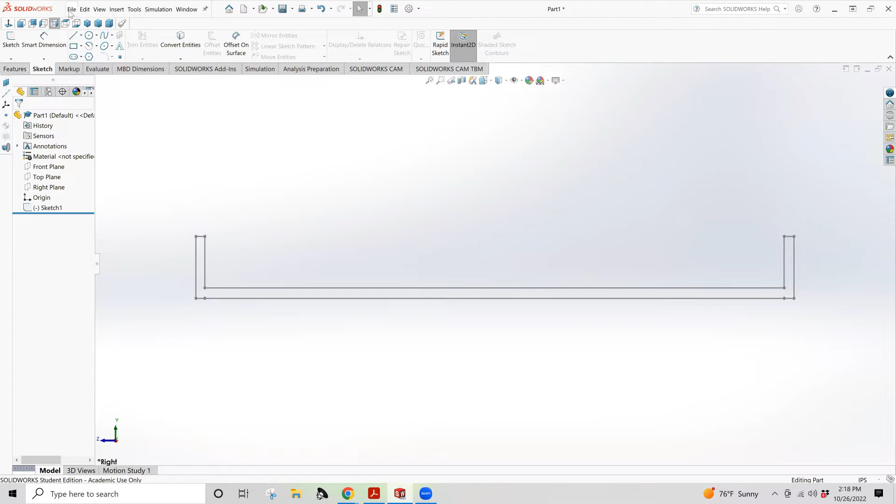And Zoom makes some of this fun stuff disappear. Note when you change that length scale for things, it's going to kick you out of whatever sketch you were in. So you got to step back into it and continue editing. So this in total is 2.7 inches. That will reset kind of the scale of things, make life a little bit easier. Smart dimensions, here we go.

You're going to have to go back and forth with the tools and do a lot of little detail work. So this is 1/2 inch. Now here's the real question. Based on the dimensions given in the drawing, can you guys figure out what the thickness of this plate is? Somebody drop it in the chat for me. There's an obvious answer, but we all know that the obvious answer is usually obviously wrong.

So somebody see if you can identify from the PDF what this actual thickness needs to be. It should be a PDF that's attached to the announcement. I should be able to drop it here as well, so long as Zoom cooperates, which is not really an ironclad guarantee. So let me pull that up real quick. All right, so you should also have it in the chat.

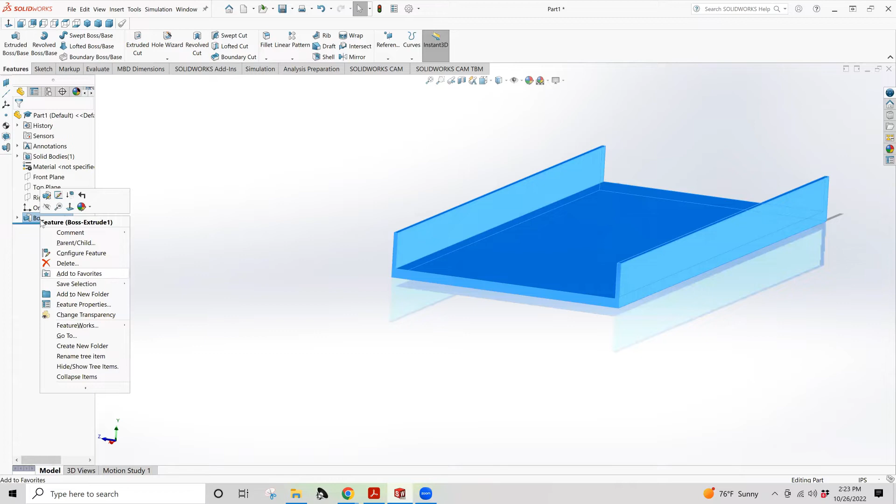After you extruded it, how did you create that symmetry? So the symmetry here is just from the base sketch that we're editing. And since I don't know exactly all the details you guys have covered in class yet, I'm not going to just assume and kind of rip through all the parts. So this is what our sketch looks like.

But that aspect ratio is not quite correct because of the difference in overall thickness. I'll do it up here so that it's a little bit more clear what's going on. So we know this is 2.7. We know this interior is 2.6. I was only off by 0.010 of an inch. I just want the record to show.

And right now, this is a non-uniform thickness on either side. So the point that we have to drive home here is this. It actually becomes a thickness of 0.05 inch because you need 2 of those to get between the 2.6 and 2.7, right? So it's half the distance of the difference in between those. So 2.7 minus 2.6 divided by 2 is 0.05. And that's our thickness on this part. So this part wall also needs to be 0.05, not 0.1.

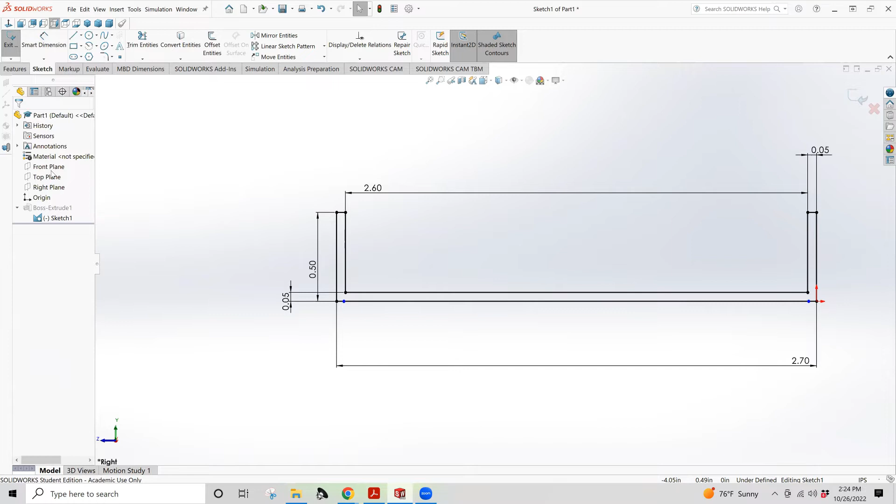And then if we hit the check mark, we step out of the smart dimension, we step out of the sketch, and we have our base for this plate, right? So in a single sketch, we captured a good 3/4 of the important detail and key dimensions of this part because we're trying to take advantage of the symmetry of the part, right?

Because you could spend probably 20 minutes or at least a good 10 minutes extruding a rectangle on the bottom, then making a plane on this side, and then doing a sketch and extruding it, and then doing a plane on this side, and then doing a sketch, and then extruding it. Or you could leverage your symmetry, and I will open up as an example, because I did that with the part yesterday.

Which one? I want to say that was 2, maybe. Let's see if I remember right. Yeah. So this one, as soon as it finishes loading, come on, load the model. This is interesting. Let's see. All right. So this should be actually opening the part. That's very interesting. Why did it not open the actual part? Here we go.

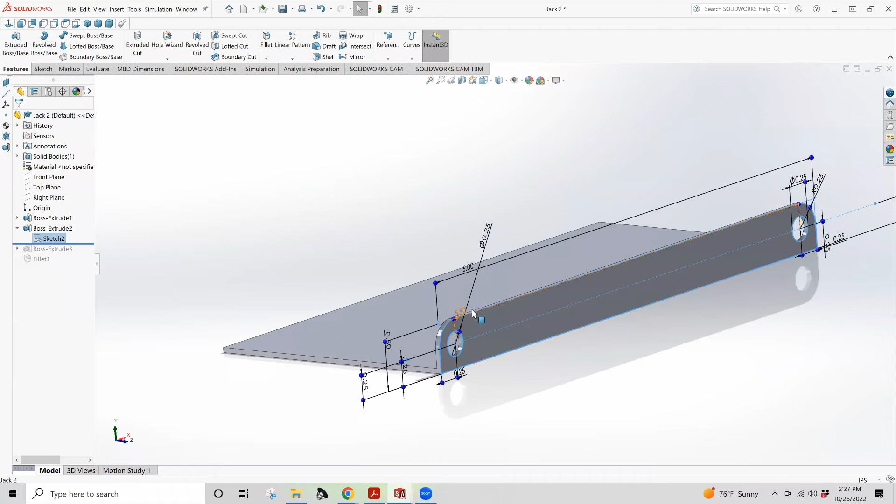Okay, there we go. So this is what I was trying to show you, the part detail. So this is part of the reason why the part tree is so important. Hopefully Dr. K has gotten a chance to speak to all of you about it. So the default is often to take an approach like this. You extrude a rectangle, then you make a plane, and you make a sketch on that plane, and then you extrude. Now, in this case, I leveraged the same sketch to do an extrude and did different parameters.

So I'll show you what both of those look like. And this is a perfectly valid approach. It just takes more time than it absolutely needs to. So you start from the sketch plane, do a blind extrusion, because I extruded it from the very edge of this face and extruded it in by 0.05 inches. Then on the other side, I used the same sketch, but extruded it going the opposite direction from this face. So one sketch, two different extrusions, right?

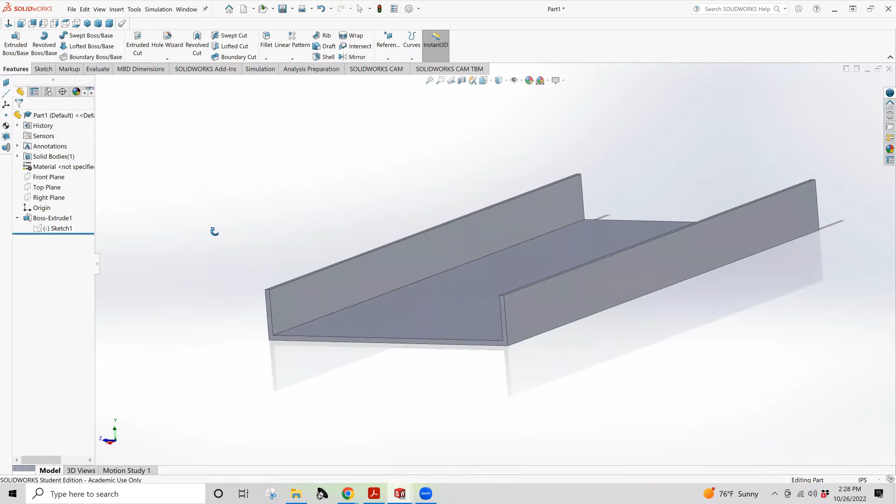This is another approach that you can take, or you can manually redo the sketch. Sketching takes a ton of time. It depends what's the most time efficient, but often what you'll find is the approach that I'm showing you is what I recommend, because that's going to leverage the symmetry of the part the most. So the time and everything like that won't necessarily be to scale, but there are a few things that you can capture very, very quickly, one of which is this fillet.

So it helps to kind of zoom in and find all of your individual edges. These need to be a 0.25 radius. And then the second fillet, based on the information in the drawing, is going to be these two interior edges, but these are a 0.025. So they're a very small fillet. So now we've captured all of our fillets, right?

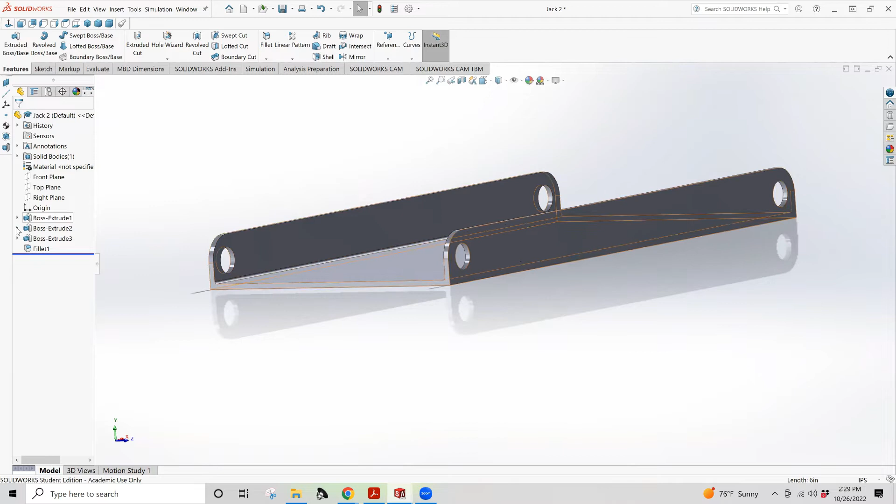So we've done a similar number of operations compared to the other method. But here I did most of the detail and then just did a final fillet. So instead of doing a fillet on the already extruded part, this was done on the actual sketch itself. So I did sketch fillets, which is this tool. Hopefully you guys have seen how to use those. So there's a few different ways that you can go about it. This one just happens to be the most time efficient.

So now what you can do is, with a single operation, you can add a sketch to that surface. No, not edit the sketch. I want you to do what I say.

Sometimes you'll have to start a new sketch. Sometimes SolidWorks will do interesting things, so you have to step out of a tool using the escape key, then step back into it.

So here we're going to need just a couple circles. These are going to be pretty easy: 0.25 inch diameter, and they're going to be on what's called a 1/4 inch pitch. So 0.25 inch and 0.25 inch. Pitch has to do with the spacing of holes.

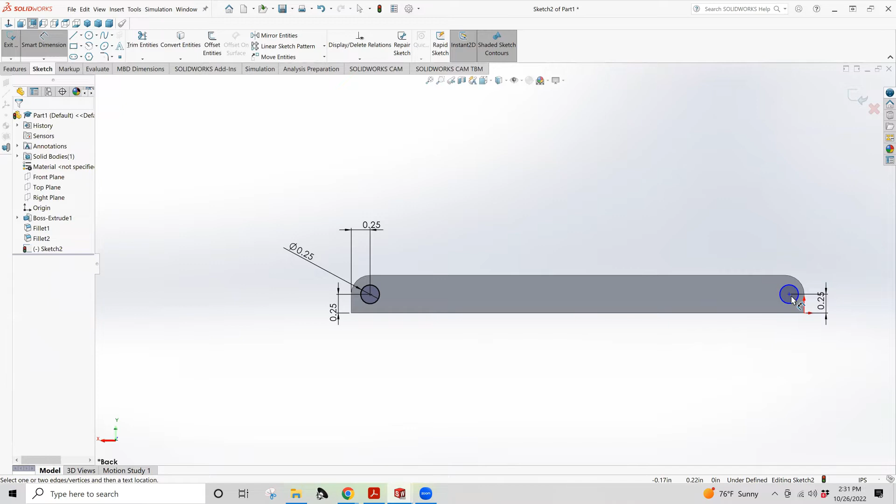You can either index based on the bottom edge, or it really helps to zoom in. You want to pick that flat edge, and your radius, so diameter of 0.25.

So now we can simply do one quick extrude cut. We already have that sketch highlighted. You're going to switch from a blind to a through-all both, which is cheating.

And that part's done. So the only other thing you would need to do is specify, I think this one is an AISI 1020, so we'll go ahead and specify material. Yep, AISI 1020, apply that. All right, so now we have our material applied.

The material is going to make a huge difference. I know Dr. K has already focused on that with you guys, so we won't spend a whole lot more time. I'll pause here for a second and see what some of the questions are, so I can get some feedback and address any concerns.

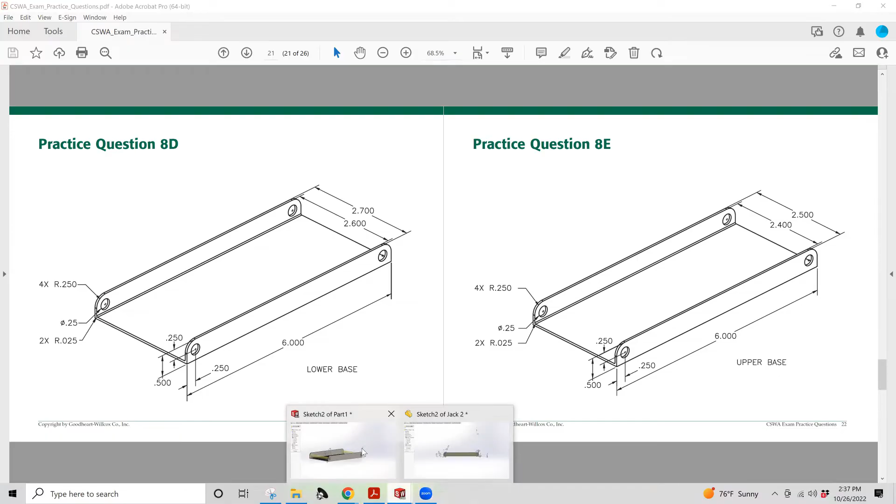So there's two different approaches we can take to this. One is going to be really, really fast, and one is going to be really, really slow. For this one, we use the technique of this base sketch and extruding. For the next one, we can show what it looks like to use multiple solid extrusions. It just takes a lot longer.

The quick and dirty method of recreating this is — in this case I'm going to save this as 2B, because I know something about that part numbering scheme, not really important why. What you want to do is look critically at the drawing, and if you have two parts that are very similar — in this case 1/4 inch pitch, meaning 1/4 inch from the edge, same radii, same diameter holes, same part thickness, same fillet radius...

If all of those kinds of features are conserved, rather than recreate this in a new sketch, the simplest method is to go in and redefine the base sketch that we used for the symmetry. This is part of thinking sort of what Back to the Future referred to as fourth dimensionally — this is actually thinking fourth dimensionally, but in a real sense.

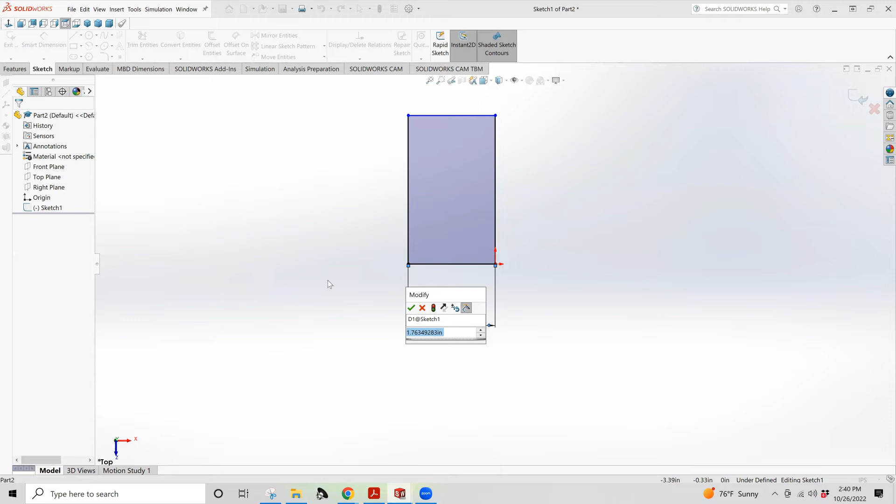So 2.5 is the outer dimensions, 2.5 inches, and then step back into the smart dimensions, 6 inches length. Now, another way that you can recreate most of the geometry without doing extra work is to think: I know I'm going to have to extrude these. Instead of thinking about extruding them from the side, we're going to use the same base sketch to capture as much of that detail as possible.

So this is going to be our same 0.05 inch thickness. We now have a fully defined sketch. Okay, the base is done. The reason I've done it that way is I know I'm going to use this sketch.

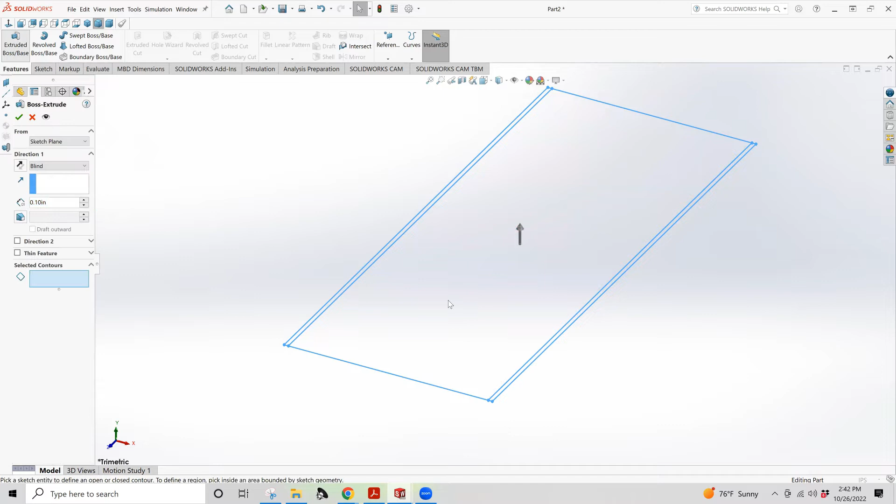I'm going to zoom in to select all 3 of these regions. Or you could do it if you just wanted to do 2 operations because of the different thickness. You could do it this way and say, I want to do the interior region, 0.05, and then say, I want to do another extrusion. You want to leverage that same sketch so you don't have to go in and recreate dimensions 6, 8, and 32 times.

And you know those 2 features are going to be the same. You always want to deselect the thin feature because the thin feature always ruins your life. Thin feature typically tells you that you have a non-closed sketch or an open looped volume.

So I'm going to delete this contour because that creates confusion. A lot of times I'm in the habit of clearing the selected contours so that I know exactly what it is that I'm selecting. I like to just have that level of control over the operation that I'm doing. And you extrude this to 0.5 inch.

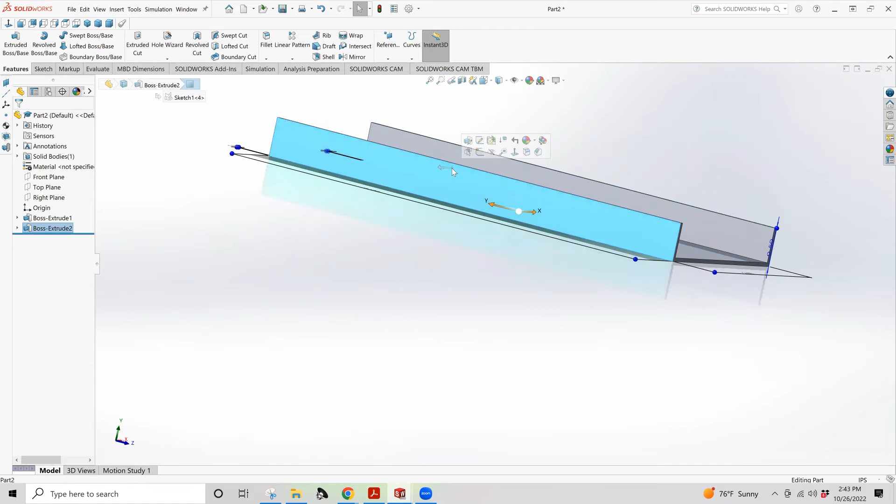So similarly, I don't lose a lot of time using this technique because I know I'm going to do these 2 extrusions. But compared to doing the same sketch on the side plane and then doing an extrusion, then recreating the sketch on this side and doing another extrusion, I'm trying to always think in terms of how do I approach the geometry and do as few sketches as possible to get the most level of detail possible out of the part.

So this is just the way that I've come to think about how I approach parts, and it served me really, really well in SolidWorks. So I'm trying to impart that to you. I know Dr. K has some similar ideas, but he teaches a little bit differently sometimes in the approach. So this is hopefully stuff that will just get you guys to think about the parts themselves.

So now we come in, do the same thing with our fillets, but I want to deselect that face. I always want to be controlling what faces or facets are being filleted. So I'm constantly zooming in and out, constantly moving parts around because I need control over what the operations are. Nope, not that face. Sometimes the mouse is there to help you. All right, so 0.25 inch radius.

All right, so we've got the majority, and then we just need the same things. We need to add a sketch, and we can click a face of something. We don't always have to use a reference plane. I'm in the habit of using reference planes often. That's why I have this reference toolbar available on my left side.

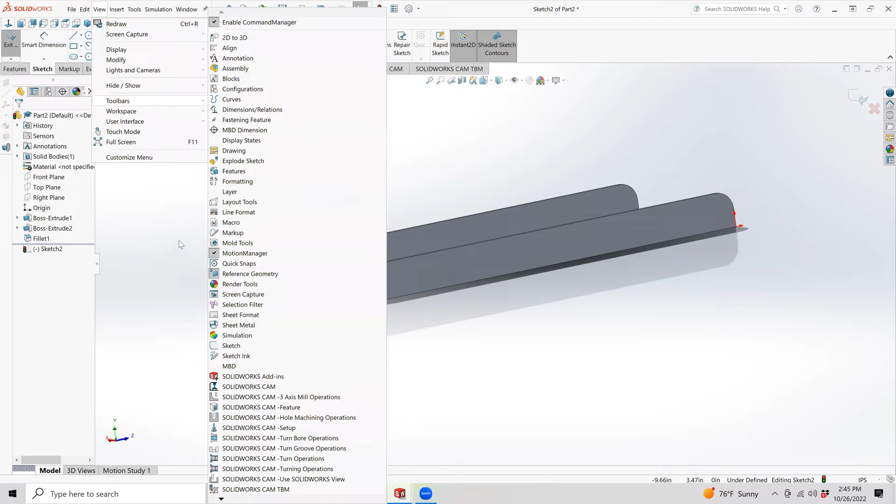So if you guys haven't seen that, make use of this view menu under toolbars and select ones that you're going to use all the time. Reference geometries for me are key for a lot of things. I'm not doing mold making and other things very often, so the reference geometries, that just happens to be very accessible because that's probably really a thing that should be here. It's more easily accessible in the sketches, but a lot of times you need it in the assembly operations and things, but you need it often in the sketches as well as you're working. So yeah, there's a reason why it's in the features panel instead.

We won't go into that now, but this one I'm going to go ahead and draw on the side just to be quick and efficient. So same deal, 0.25, then set up the 0.25 pitch.

Same thing here. And you can even make better use of some other features, like for instance, if I didn't want to do that, I'm going to step out of the tool there. I'm going to delete this. Yes, universe won't actually explode. If there's a lot of features, then what I'm going to do is I'll step out of that sketch.

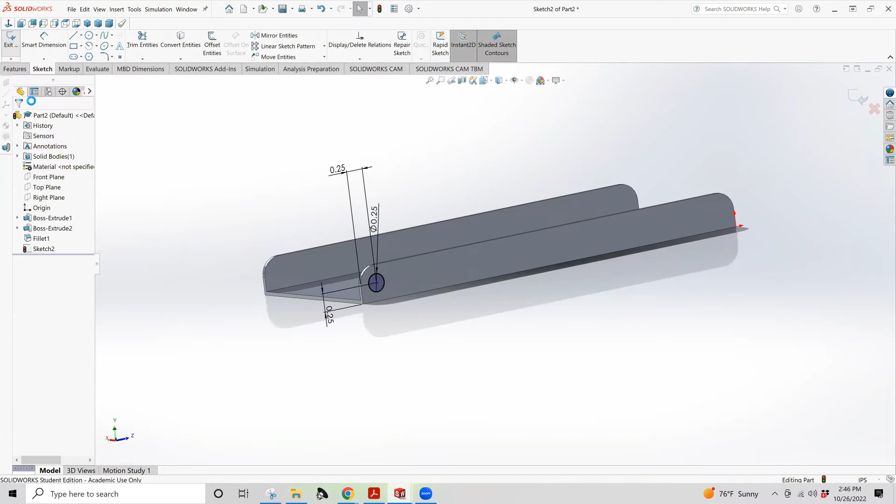I'll make a reference plane, but I'll do it in this way, where I'm going to pick the actual points, not an edge, but I'm going to pick the actual center point. I'm going to pick the center point here. And then I'm going to pick the center point here. And that usually gives me, even if I use this one, there we go. 3 points defines a plane.

What I can do is use that plane as a bisector if I'm working on a part that has symmetry side to side. There's a couple ways you can do it. Just trying to get you guys to think about some of the different options.

We can go back in and edit this sketch, or we could edit this sketch and say maybe I want to go ahead and do that extrude cut. And I'm going to say through all.

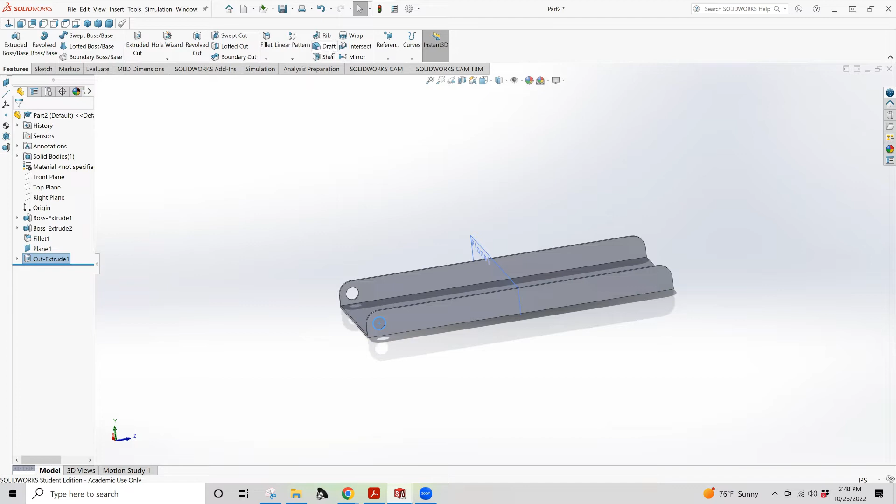And then I say, now I want to take that and I want to mirror this. You can mirror this about the plane. And what you'll see is that same operation can be copied over.

There's a lot of ways to leverage the symmetry in the software that you can do some very interesting things with. You just have to think in terms of how can I get the most effect out of the process. So doing the 3 different sketches and multiple extrusions and extrude cuts is the longest possible way to make the part and is going to consume the most time.

Different approach, still using some of the time-saving techniques in terms of thinking about how to leverage symmetry in the process. Really, I could have just designed 1/4 of the whole thing and done a lot of mirroring to get to the end result.

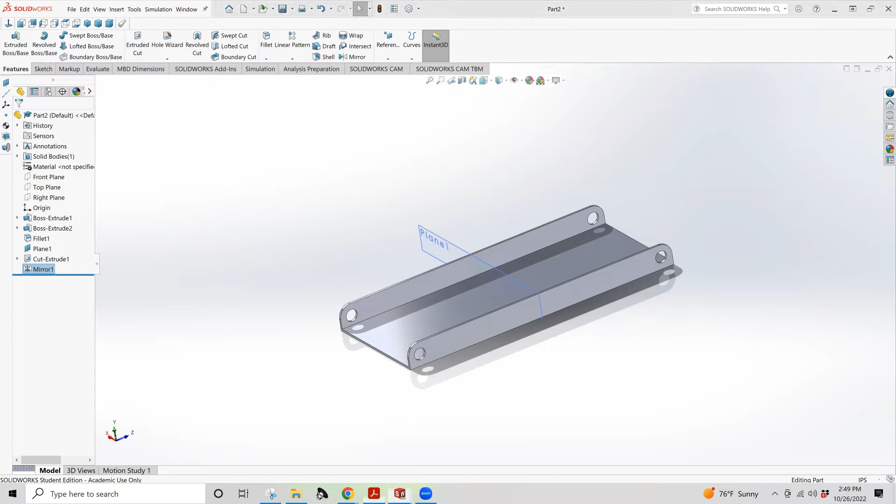But where that's going to bite you is if the part then is told to change. It's one of the things that they'll do, especially in the CSWA, is they'll make you do something and they'll do a part 2 of that question and they'll change these values on you.

So suddenly maybe the length here at B is different in the new version. And then they change the angle for C, and then maybe the diameter of this changes. If you used symmetry for absolutely everything, sometimes they'll make changes that'll make it asymmetrical.

And if you use too much of that and try and be too clever, you can end up having to recreate the part again anyway, or modify the final version. There's still ways around it, but it's things to be thinking about and considering.

All right, so the next group of parts, the cylinder for the center is pretty simple, but let's focus in on the pins and why it's so important to be able to use the symmetry that's involved. So before we do that, any additional questions?

When we go to create the pins here, there's a couple things that we want to keep in mind. One is, because these are cylindrical, there's symmetry. So let's take a vote.

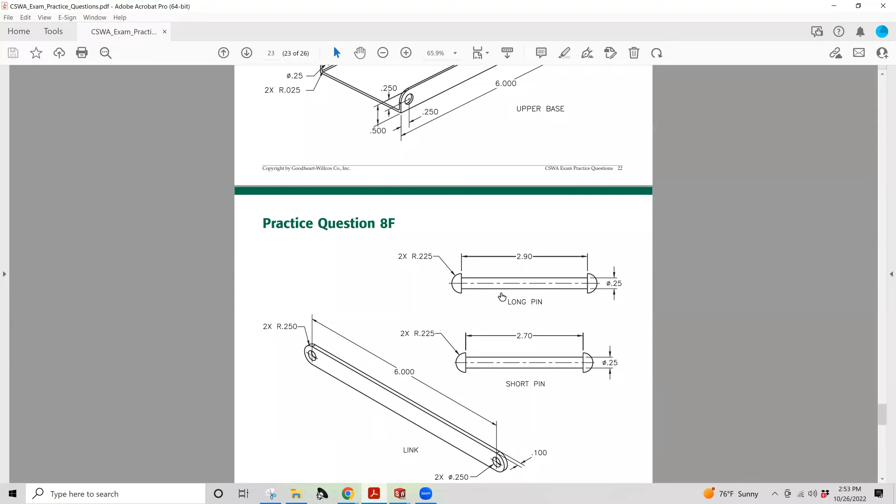What approach do you guys think we should be using based on the kind of geometry that's here? What approach should we start using for this? Should we do extrudes? Should we do extrudes and domes? What would be the most efficient?

I think someone said revolve in the chat. Yeah, revolve. I was looking to see if anybody else was going to chime in or if everyone thinks it's a trap. The answer is it's always a trap.

So what we're going to do is use our vertical reference here. We're going to switch again, since everything in this particular part has to be IPS. And we're going to create...

I'm going to go back to this sketch. Here we go. And we're going to create this part of it. So really, this doesn't take a significant amount of time, but it's something that we want to be thinking about.

And in the case of the part that we're making here, I want to make sure you actually get the concentric point. There we go. So you want to make sure that that bullseye looking symbol actually gets highlighted. Bunch of reasons why.

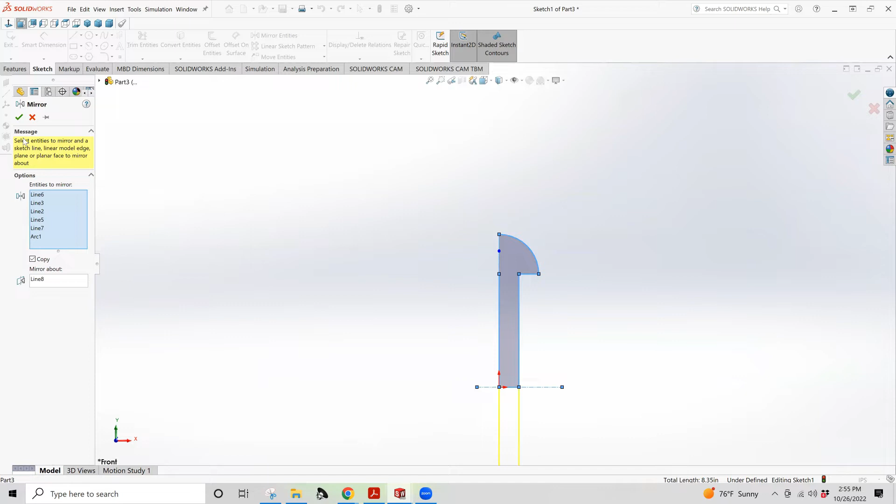We only want to mirror it on the one side. And then we can dimension it after the fact. So we have two different sizes, 2.9 and 2.7.

You can also cheat. Sometimes this will make a mess of things, not always. Radius of 0.225.

This one, I think that's actually a typo on that one. Yeah, that one's actually a typo. The overall thickness of this is 0.25. So let's go ahead and set the dimensions here, because this turns out to be very, very important.

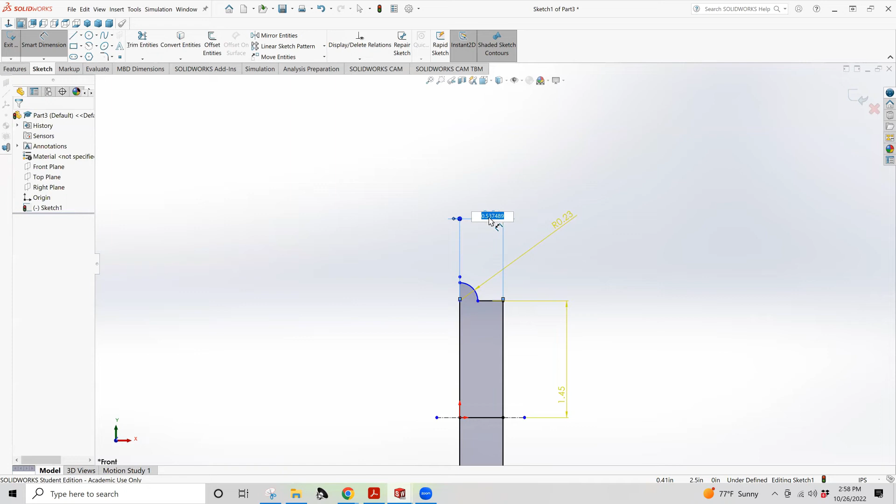So then our overall distance is going to be a little bit less. That actually, yeah, this is our center line. So that part's correct. So center line, and this one. So just for the sake of interest, you can specify this dimension. Doesn't really help because the distance we really need is this one. And at 1.45, this becomes very important. So let me take away a couple of these dimensions and we'll see why it becomes so important.

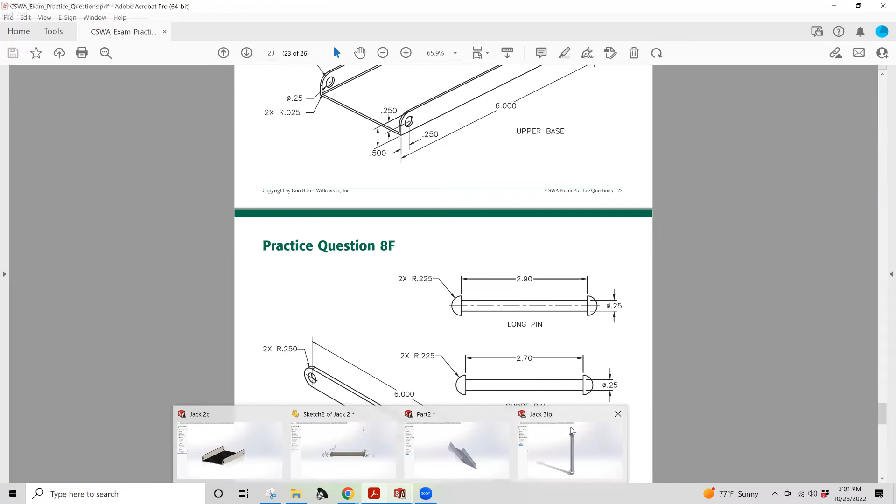So here again, instead of going in and recreating the geometry, it's often going to be easier to use 2.7. But I'll do a slightly different thing with the dimension so that you can see what happens. So we know 0.225 and 2.7 gives us the overall length. So it's the effective diameter created by this. So 0.55 and 2.7. So I'm going to change the overall length of this pin in order to save it as the short pin. So that's going to be SP. And then I'm going to go back to that base sketch.

So this overall length, you can do it here as well. But this is going to be based on our dimensions here, 2.7 plus 0.55. Just still have that dialog box open. 2.7 plus 0.55. 3.25. So now we step out, rebuild it. Anyone see a problem with that? See if any of you spotted it.

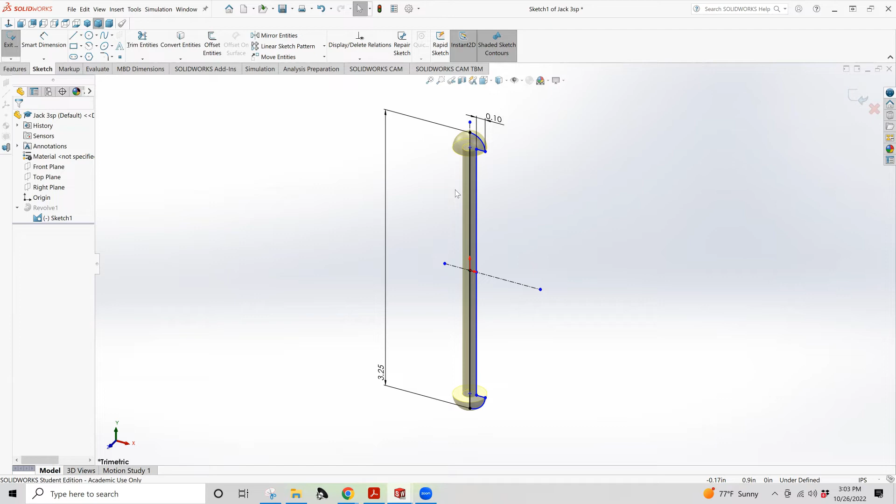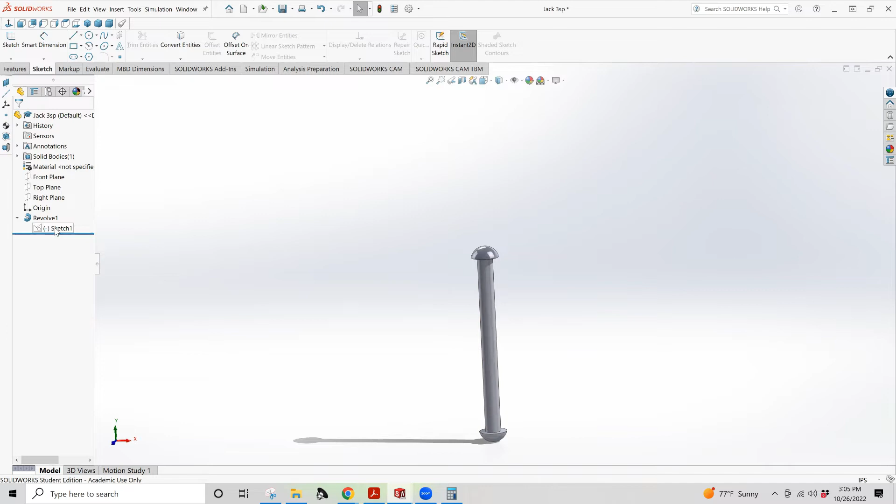So 0.075 is way off because we just changed the length of the pin overall. So by messing around with the arc and that distance, I knew it was going to mess it up. So I wanted to show that to you guys intentionally so that you could see what was going on. Now you can fix that easily enough by commanding it to just be 0.125 as it ought to be. Now we have the short pin. But we want to double check and make sure that we know where our radius is, because where's the radius of that arc?

So is that arc right? It's the wrong value for our radius. What should it be? 0.225. Wow. So stuff gets really messed up when you don't have a fully defined sketch. It's almost like we tell you that for a reason. So I wanted it to fail in multiple ways so that you could see just how far off you can get, even though it seems like it might still be kind of correct, right? So we want to pay attention to all those little details when we go to put together parts for anything in the CSWA. So we're going to save that. Make sure whatever garbage we had originally was completely erased.

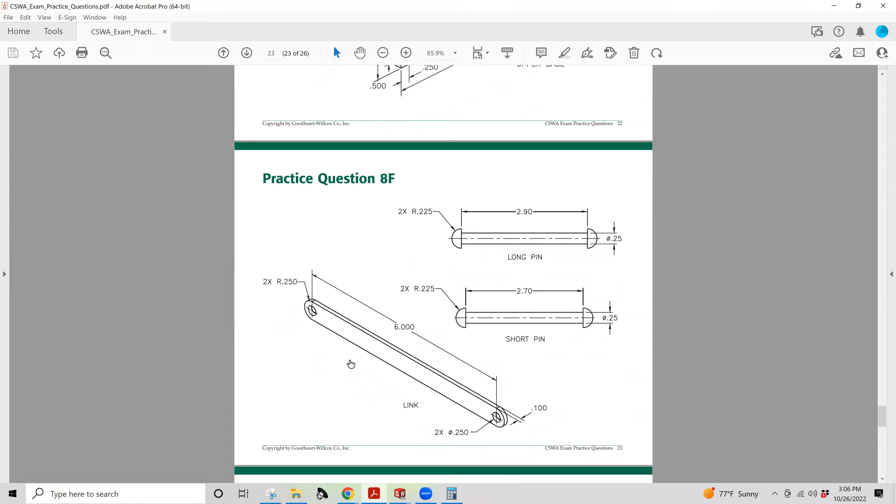All right. Next part. This bar is pretty straightforward. You're just going to need a lot of them. So for this one, what do you guys think? What's the most efficient way to do this one? Let's take a vote in the chat. Yeah. This one's going to be far more efficient from an extrude. So it's the right approach to be thinking.

All right. But instead of thinking in terms of extrude and extrude cut, you want to think in terms of how much symmetry, again, can I leverage? Look, man, it's just a rectangle with some end caps. Like, how hard is this? You'll see. I want to get you guys, again, thinking about symmetry. Symmetry is so, so, so important.

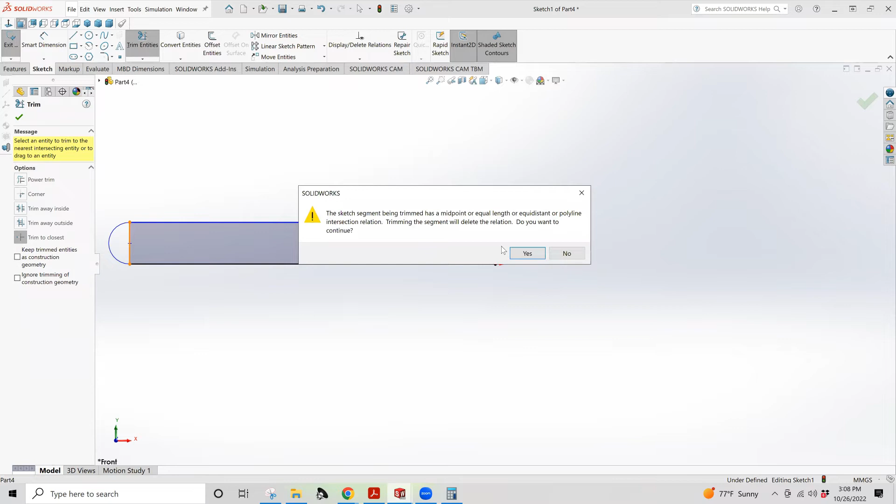Yeah. And I'm going to switch to IPS for each of them. All the warnings. All right. Circle. Going to go back into the sketch. There we go. Edit the circle. You can use the slot tool. Absolutely. It's not necessarily a whole lot more or less work. We'll put the slot down here just as a point of comparison. So you can use the slot tool, and that works very efficiently.

No, I want a circle. Circle. This one is just a quick method of how to think about it. Otherwise, you're probably ending up with the slot centered at the origin. There's times when that's beneficial, times when it's not. So that one, in terms of time efficiency, pretty much comes down to personal preference.

So this is 0.25. This one is 0.25. These radii, 0.25. That length is 6, center to center. So center to center, 6 inches. Now, the slot tool, I wanted to do this on purpose. The slot tool will not do this. Some of you get to this point and you're like, well, I'm going to fail the exam.

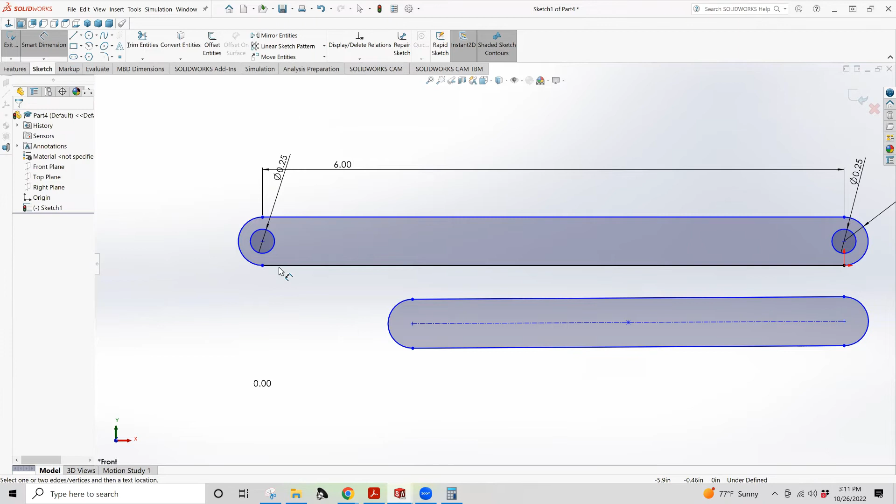But when something like that happens, you just want to think about, actually, let's take that distance down to 0. So quick recovery from what is really ultimately just a distraction. And that one should be fully defined. Five. Then this one didn't have full definition because it was missing some of that detail. So what I was doing is I was orienting this end of the sketch relative to the origin, because I recognized from experience that that's what detail it was missing. A lot of ways how you can tell that, and once you're done with these kinds of movement dimensions, you can typically get rid of them.

What this is attempting to do, yeah. You have to establish some horizontal distance for the arc, because these are arcs. That's something that is built into relations in this slot tool differently. So getting a fully defined sketch is going to be just a few seconds faster in a slot. Just something to keep in mind. So normally you guys would see 3 different versions of a 6-inch length definition on a part and think that's going to be overdefined, but it's not, depending on how things are set up in the actual sketch itself.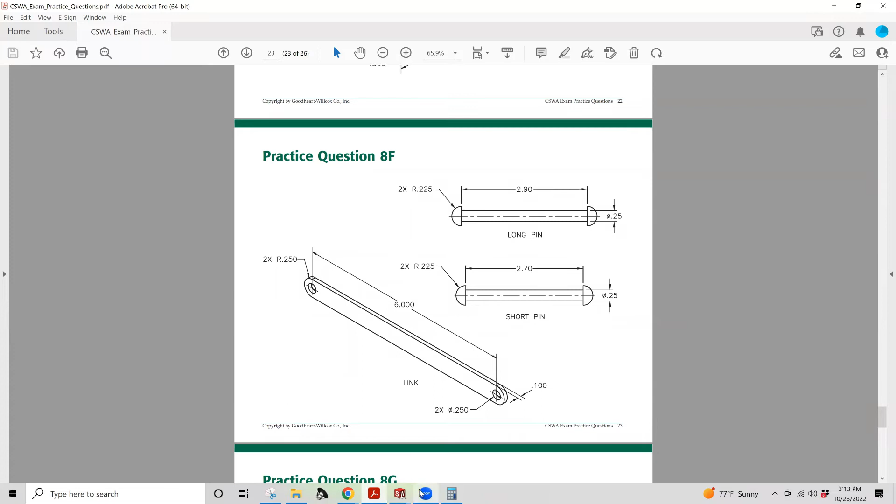So now step out of that tool and delete this. I just wanted to show you again some different examples to get you thinking and to teach you how to recover when you start down a path and then kind of get stuck. So these actually do get extruded to 0.1 inch width. And again, you'll specify the material to AISI 1020. I think I didn't do that with the pins, but you'll get the idea. We'll go back and do that for some of these parts for the sake of completeness, because it turns out to be important.

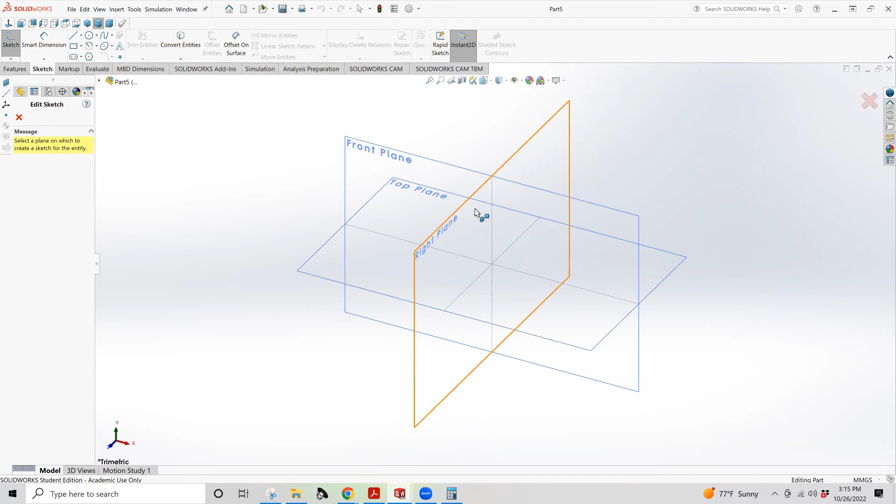A couple more. Each time you update the material, you want to make sure that you save it, because that will update in the actual part itself. Recent long pin. There we go. AISI 1020, apply. Okay. Last part, I think, is our cylinder. So I'm going to use the right plane for that one. Switch to IPS, just because it'll make keeping track shorter, fewer things for me to type.

So let's see, this one. Oh, there's the end collars. Yeah. Forgot about those. All right. We'll show maybe a couple different ways to approach those as well, and then get into the mates so that we can dig into how to establish some of those relationships. Because a number of them that we're using today, I can guarantee are going to be on the CSWA exam. So you want to pay very, very careful attention.

This one, was it 0.375, I believe, and 0.55. Yeah, 0.375 and 0.55. It's almost like I've been here before. Now, there's a few different ways to approach this. We have our fully defined sketch. What's the easiest? Let me know in the chat. What is the easiest method of approaching this? What's going to get you the best results with the least amount of time?

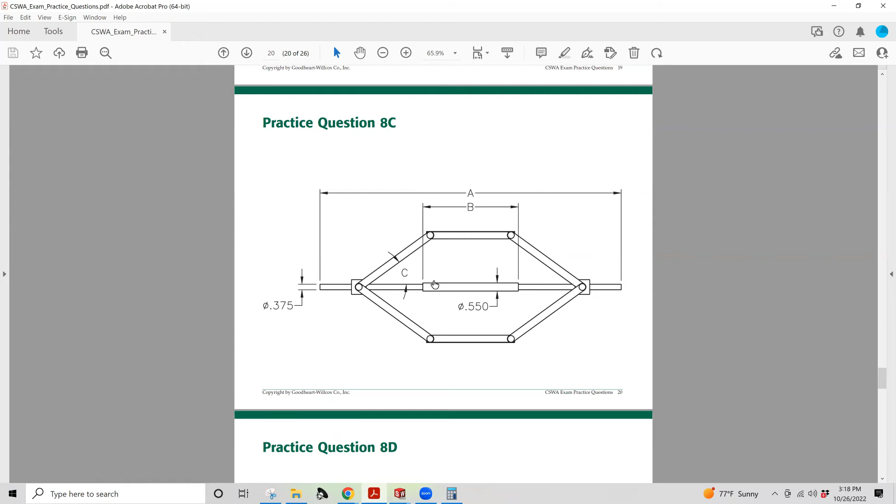But we'll do it this way just to show, again, an example of how to think and how to approach these parts. So we know what that distance is, and it's 6.7 inches for B and then 20 inches for A, I think. 6.5 and 20.5. I was pretty close. All right, 6.5 and 20.5 are our two key dimensions.

So do it from the sketch plane, but if you don't constrain yourself early on, you can take advantage of what's called the midplane, and you can say 6.5. Now, half of 6.5 is on one side, half of 6.5 is on the other. I do another extrude.

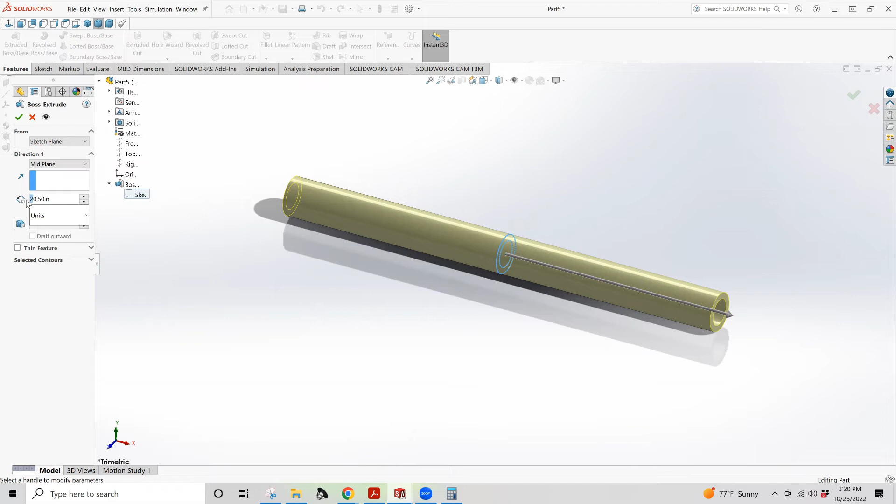So could a revolve here be slightly faster? Maybe. 2 circles is pretty quick. Select the contour. Just the inner. Select my material. And I'm done. I have a fully defined part.

Right? So the midplane extrusion actually is very, very useful for that kind of part because we can leverage the symmetry that's involved a little bit more efficiently. So I do 2 operations from the same base sketch and I'm done. So this one, I'm going to save as 1B. All right, final part now.

This one, we need 2 of these guys. So a couple different geometries involved. We've got a vote for the cube. What does everybody else vote? How would you create this part?

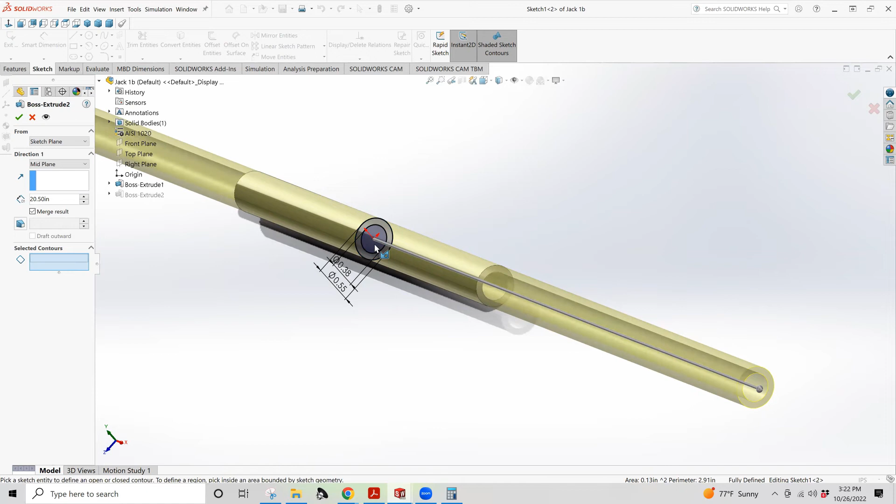I could have done the same thing for the outer region and then done a completely hollow extrusion. Same technique works for a lot of other things, but the one that we actually want is that interior region for this part. There you go. Tyson's thinking correctly.

So what we want to do is we want to leverage the part that we've already created because that's the correct way to approach this. So you can start by creating the block, creating the thing. If you don't have to recreate something 100% from scratch, don't, because it wastes time. It's not needed if you've already created something.

So in this case, I need to work from the longer pin because that has the 0.25. So I'm going to save this as the last part before I go messing up this specific part file. There's ways to recover this, and I'll show you what that is as part of this process too, if you get just flat out too excited and you get too far along. We're going to do 4B for block.

All right. We're going to take this. We've already got the majority of the things created here. We could go back and edit this base sketch. I'm going to not do that for this particular part because I'm going to create another sketch that is separate from this revolve. No, I don't want to edit the original sketch. I want to create a new sketch specifically.

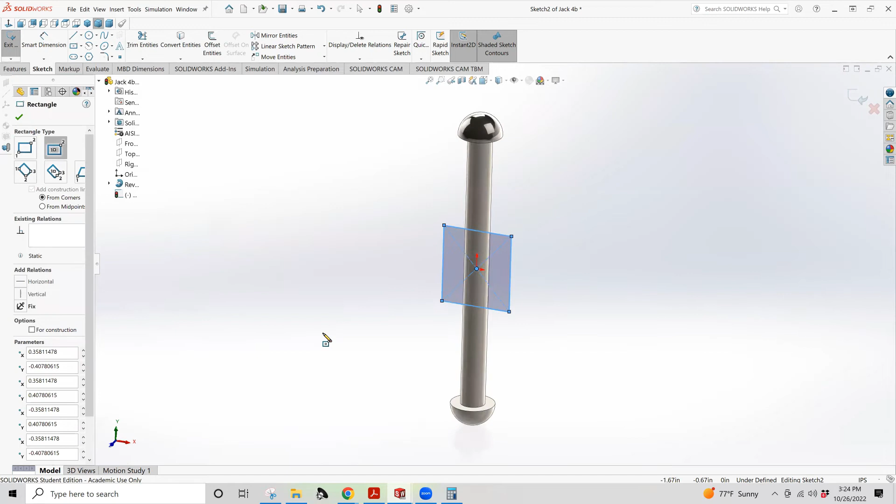SolidWorks often reads my mind very incorrectly. Imagine that. Now I'm going to come in here and do a center point rectangle. Now I want you guys to be in the habit, every time you go to do this operation, of resetting your view every time you go to look at a sketch so that you're working perpendicular.

I still make mistakes sometimes if I'm doing a sketch off axis. I can do it, but it's not the most efficient. So you want to make sure you're keeping your view square to whatever you're working with, because you don't want to end up costing yourself time and having to do work again and again for no good reason. So it's a 1-inch cube centered at the center point of the pin, which makes this fairly easy.

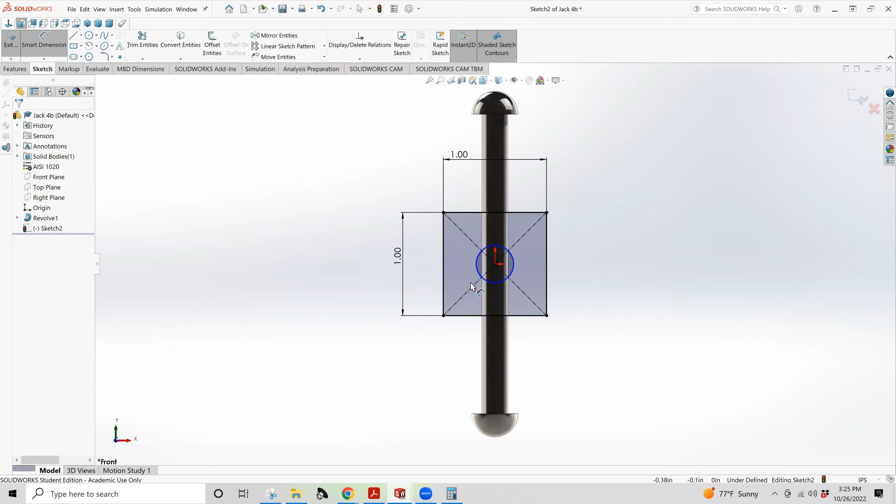This one, what's that diameter again? 375. Yep. All right. 375. Nope. Wrong part. 4B. Another reason why I chose this as a specific example is it gets to be a little hairy. There's a lot of individual parts to create, a lot of techniques to cover. It's a good refresher on drawings, etc. 375, so it's pretty close. All right, this is now a fully defined sketch.

So we extrude. You want to make sure it's this region. This one, you're going to do mid-plane, 1 inch. And that's what it's going to give us, a mid-plane 1 inch, which you can take advantage of because of how this works. We still have to do our through cut. So we're going to do an extrude cut, use that same sketch. Wait for it to load, same region. Select that interior region, and you can do a through all. The problem is that's only going to cut the one side. So in this case, you need to do a through all both, and that will cut out your hole.

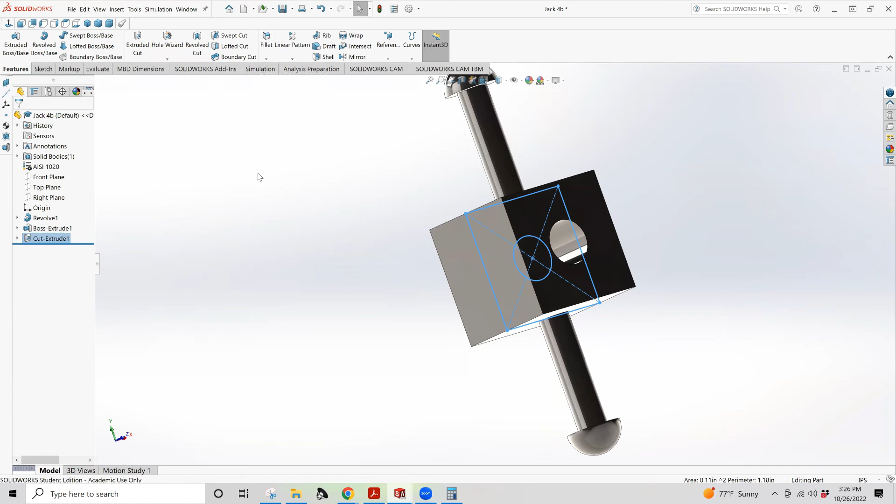Then all you're left to do is a chamfer. 45 degree at, I think this is a 0.05. Yeah, it looks right. There we go. And because we had already specified the material for this, it saves us a fair bit of additional looking through things. So if we can leverage an existing geometry to get the features, then we're going to be in good shape. So 0.05 inch chamfer at a 45 degree angle is what that notation is referring to.

And I don't have to worry that the block is at the center point because I set the center point of that revolve as the same center point for my rectangle that I turned into a square. So saved a lot of work and additional headache to recreate the whole entire thing by leveraging the part that already exists. So these are some of the things that, if you are familiar with that process, the CSWA will let you do. So it's just something to pay attention to. All right.

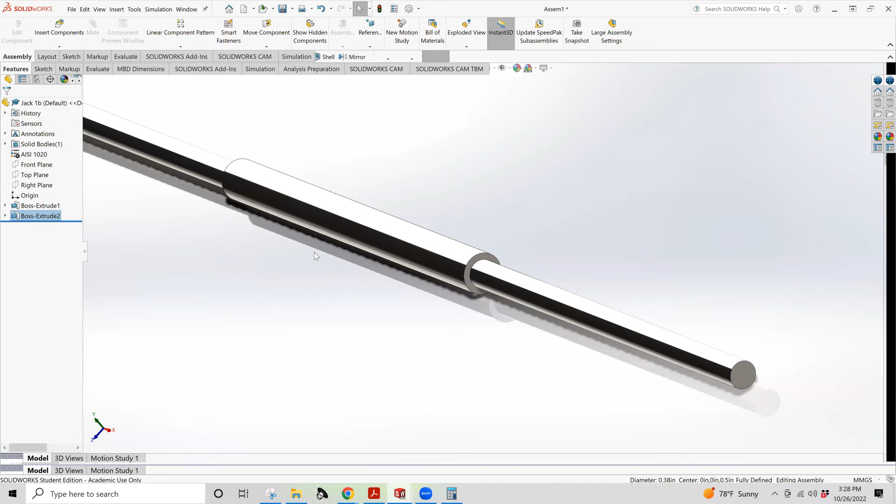Now we have all of our parts. We need to assemble them. So we're going to make an assembly. And then we're going to spend the next 150 years doing mates. So you might want to get comfortable or stand up, do a little neck roll, get the blood back up into your brain, right? All right.

We're going to do 1B, 2C, 3SP, and 4. I'm going to bring those in here at random. We're going to insert some more components. There's another thing I'll show you kind of quickly. 4B. So we've got a 4B. We've got 2C. We need a 2B. All right. So this covers most of it. What did I save this one as? 4. Yeah. I think I resaved this as 4. It's all right. Going back to the assembly, which is denoted here if you're going back and forth between different things. We're going to need part 4.

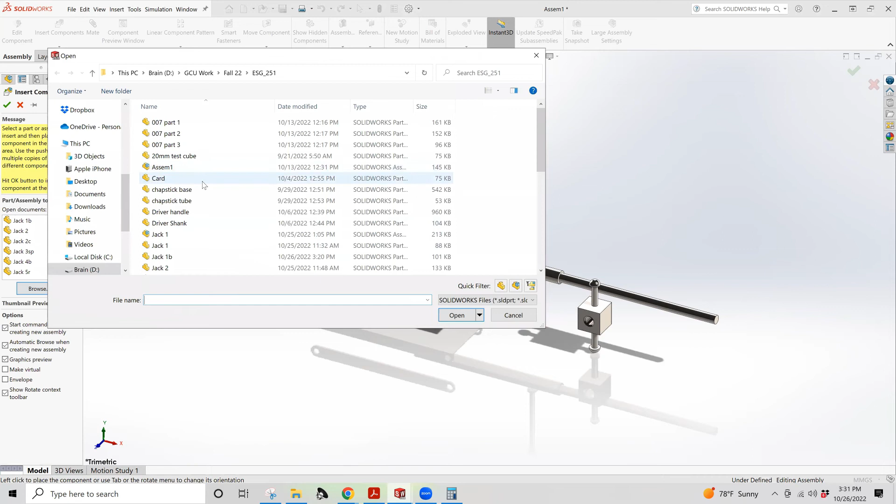We've got a short pin. We're going to need long pin as well. So grab one of those. Long pin. All right, that one needs updated. So let me go back and edit that one because that one did not have the material saved. LP. Easy little details to miss. There's another reason I picked this example. It's very pedantic. There's some repetition, but it's a very good example such that if you can do this and you can do it reliably, you can make it all work. So now when we go to the assembly, you'll see that our material has updated because it auto updates the assembly based on the saved parts.

Now, you can do linear component patterns. The problem with this, you'll see in just a second. I need a total of 8 of these. And this is the entity that I'm using. And I need it in the direction of, I'm going to cheat here. Say I need it in the direction of, nope, delete. In the direction of, come on now, the direction of this face.

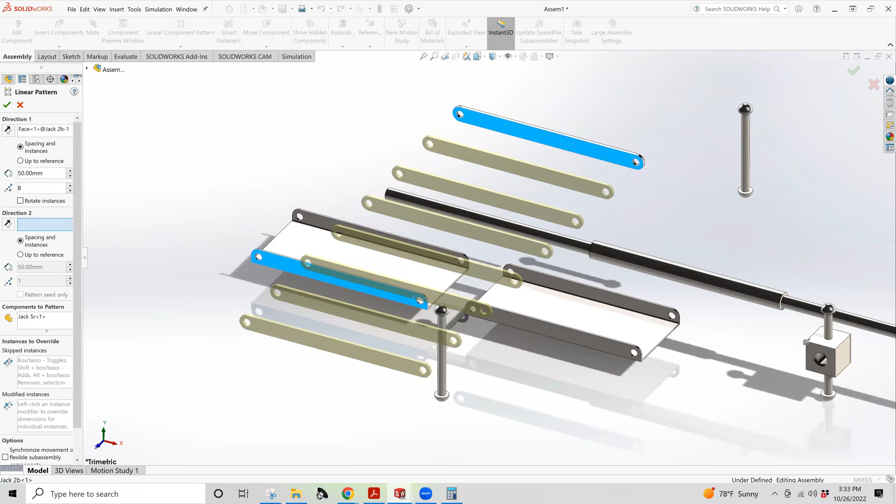The problem is when you do a pattern, they are all linked together, which if they should be, that's okay. You could bring these in as pairs, technically, because of what we're having to do here. Most of you are not going to think to do that. So I'll show you what it looks like to do a couple of pairs versus a couple of others. The problem is, especially with the way that they're linked, you need to be able to control the individual distances. So it's really best to add mates and constraints individually for these parts. Whole bunch of reasons why.

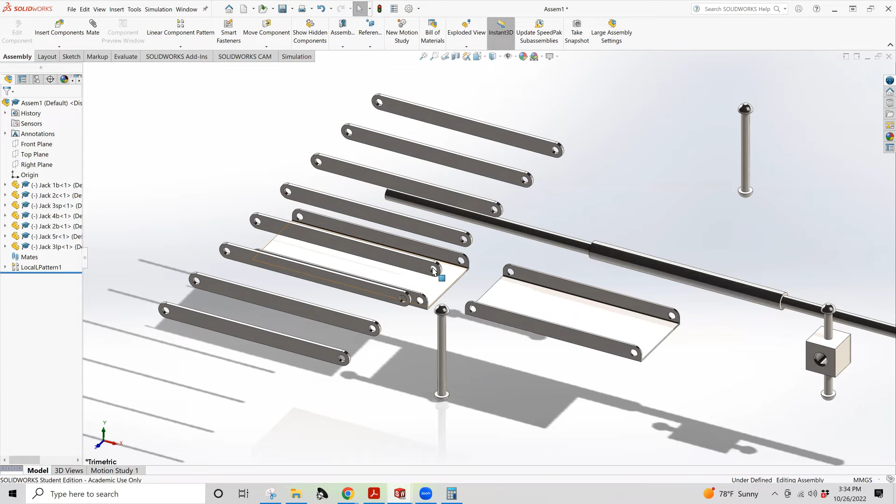So the first thing in is going to be what's called fixed. So you have an option to fix or float. I'm going to go ahead and float this because I know I'm going to be moving a bunch of stuff around. And instead, I'm going to take a look at what our instructions tell us is right here. Lower base is the wider one. And in our assembly, it becomes real obvious which one is the wider of the two. So because this is the lower base, I'm going to fix that component so that other stuff can move.

I'm going to get rid of this local pattern because we really just need this one. The copy component option also really doesn't help you in the way that you might think. I seem to recall there was a move or copy option up here, but that appears to not be there anymore, so that may have been something they got rid of. And you'll see an option here that looks really enticing: just copy it with the mates and then everything will be great. Problem is you can't even select that component, so it doesn't really do you any good.

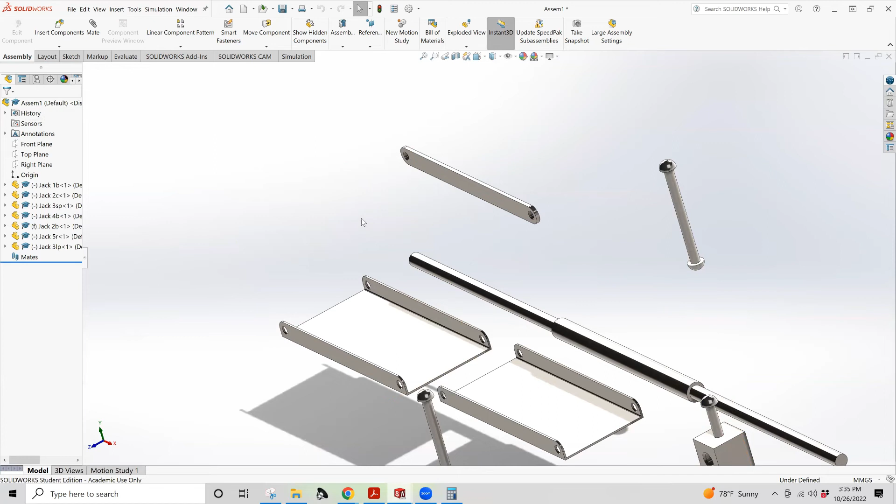All right. So real quick, we're going to bring in a couple more of these. So we're going to insert component. We're going to bring in some more 5R. And really, there's just not another way I'm familiar with on how to bring in 150 of something without it taking a couple minutes. So we have 1, 2, 3, 4, 5. And it just takes a little time. So now you have 4, 5, 6, 7, one more, and then all our 5Rs are in. Okay. So 4 and 4, got those.

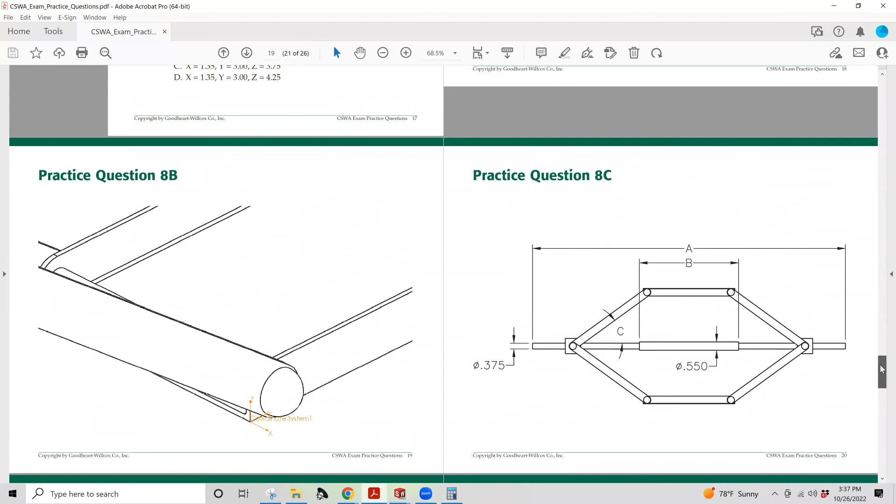We need one more each, the long pin and the short pin. This is why naming them carefully turns out to be pretty important. So there's a short pin. Here's the long pin. All right. Long pin, short pin, and we need one more block. A lot of parts, but you got to have all of them to create the part the way it needs to be created. So you want to pay careful attention to a couple details. We'll come back to angles and things because now is when the mate process becomes really important.

So the interior here, the way that they've set the whole thing up is pretty interesting. So you have the wider base on the bottom. You have these rods on the outside. Then you have just inside of those, the rods going up. And on the inside, you have your top plate. So there's a number of different ways to use mates to line up all these components, and we want to pay attention to each and every one of them.

So we're going to go back to our assembly. The ones that you're going to want to make use of for things like this are coincident, concentric, and then width mates under the advanced tab wherever possible. So let's start taking a look at those. This is where a lot of this comes in. So you can manually select concentric. We're going to take the long pin, and I'm going to say that and this need to be concentric. And then I'm going to make use of an advanced feature called the width.

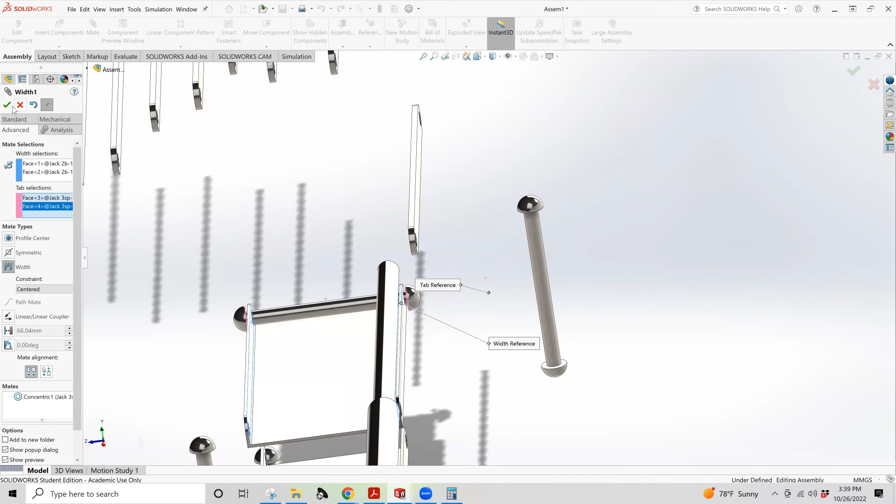So you want to grab the inside faces or the outside faces of something, and then the second two are another set of parallel faces. What this does is create a mate where you have the width of something evened out between both sides. So you hit OK. I'm going to do the same thing for this. And actually, switch back over, do concentric first.

Hit the check mark to save it. Then add in the width mate. I'll do the outside just so you can see that that works the same way, with the two faces and the two inner faces.

Really, really helpful tool for getting things lined up and even. I'm going to do the same thing for these. Some of this is just repetition, but nothing much we can do about it, except we have to establish all of the things. So I can select them in reverse order, that's fine.

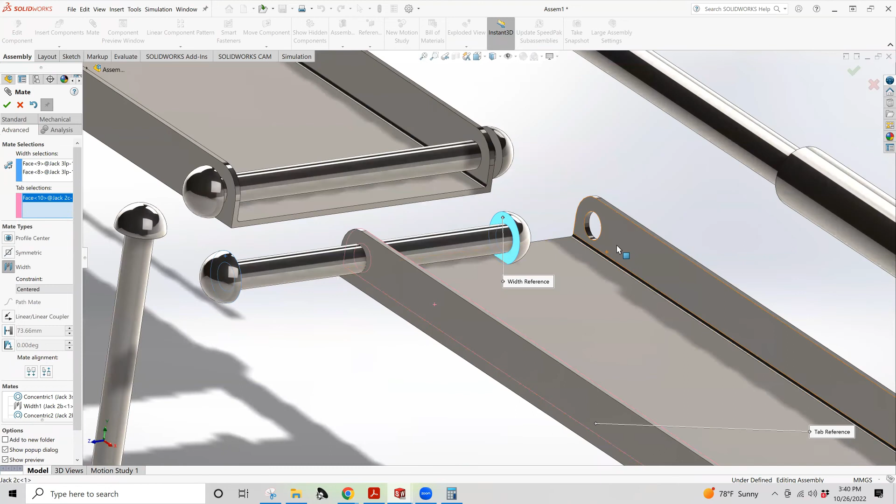Okay, so these are the shorter pins. Same deal, we're going to set concentric first, then do a width mate. Here we go. Concentric and width.

So now we need to set up a relationship with this. We need to do a couple things. When things are floated, you can do what's called a free drag. I'm going to step out of the mates for a second, just to make sure you understand this.

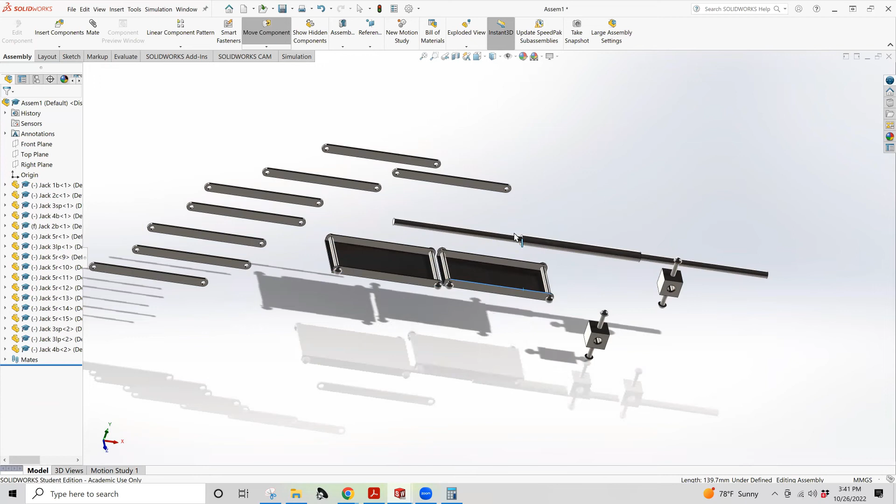Anything that is floated can be free dragged in the environment in any direction. Anything that's fixed cannot, so you want to be very careful about how you orient stuff. We're going to talk about the origin, moving those, center of mass, etc. You can kind of get things in the free drag mode close to positioned where you think they should be, and that will help get them grossly into position where they need to be. So like this one, I know we're going to need to be there.

So there's a couple ways that we can set up the orientation. I'm going to orient these two top and bottom plates to each other first. The simple instinct might be that you want this top face and this top face to be parallel. Okay, great, but you need it the other direction. So you can do what's called flip and do an anti-alignment, which for some things becomes very, very helpful.

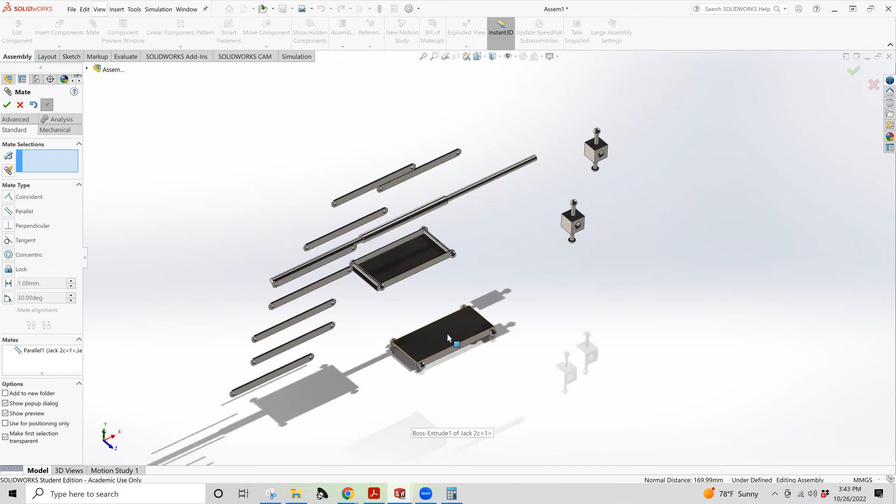Now, I'm going to step out of the mates again for a second to explain. This is still fixed, it's not going anywhere. This can still go somewhere, but we're not rotating it and moving it around in any kind of weird orientation at this point in time. So we're going to get that sort of lined up more or less in place.

Make sure to make everybody positively seasick, because that's the best way to do 3D operations. All right, so now we start visualizing how all of our parts are going to come together.

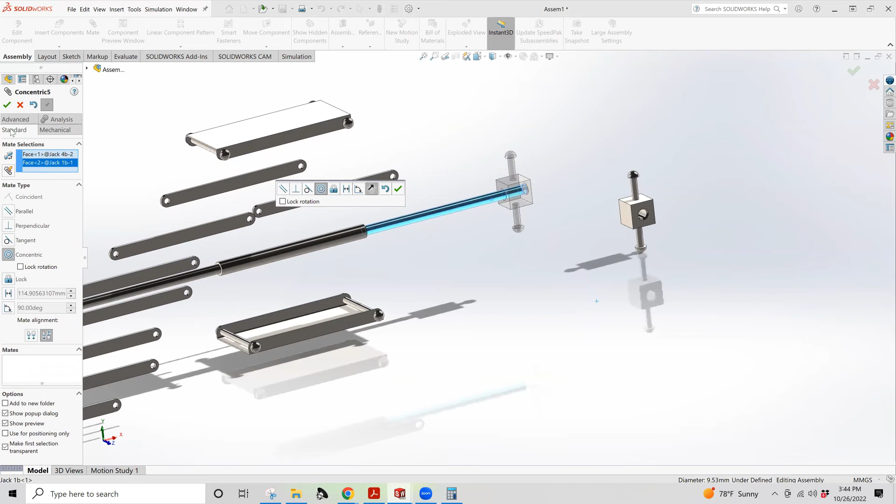So we're going to do the same sorts of things with this one. We're going to do concentric. So it's not going to be that edge, we're going to do concentric, it's going to be looking for cylinder and this side. Don't worry about the orientation yet, we'll get there. So we're going to do another concentric.

Okay, now we're going to do a parallel between this face and this face. And this one, we can move pretty freely. So I'm going to move this a little bit out of our way, trying to keep roughly the same orientation.

This one, they mostly constrain these movements in the XYZ plane. You can rotate the components, but we'll specify rotation parameters in a little while. For now, we just want to establish parallel. And if that part were asymmetric and we needed to fix it, we could change it to being anti-parallel. Lots of options and approaches on how we do that.

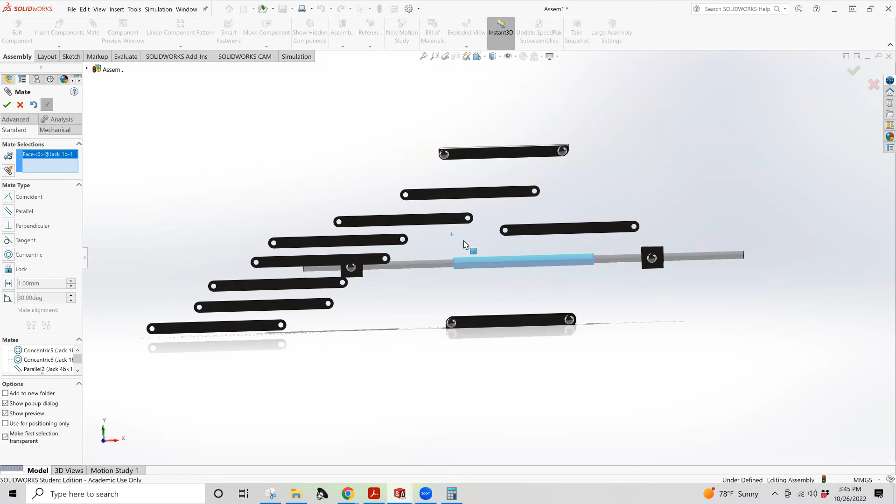So this one is still floated, but it's fixed sort of within a range of motion. It's going to move with this center rod now, so that whenever I move this, even side to side, they're going to maintain their orientation relative to each other, and they're going to maintain their orientation as far as being parallel to these plates. So you can see we do have a little bit of misalignment here.

One of the things you can do is add another mate here to say I want this face and this face to be parallel. That will maintain an orientation, but really the most appropriate way to do this particular mate, to make sure this plate is correctly oriented relative to this one, actually turns out to be another width mate.

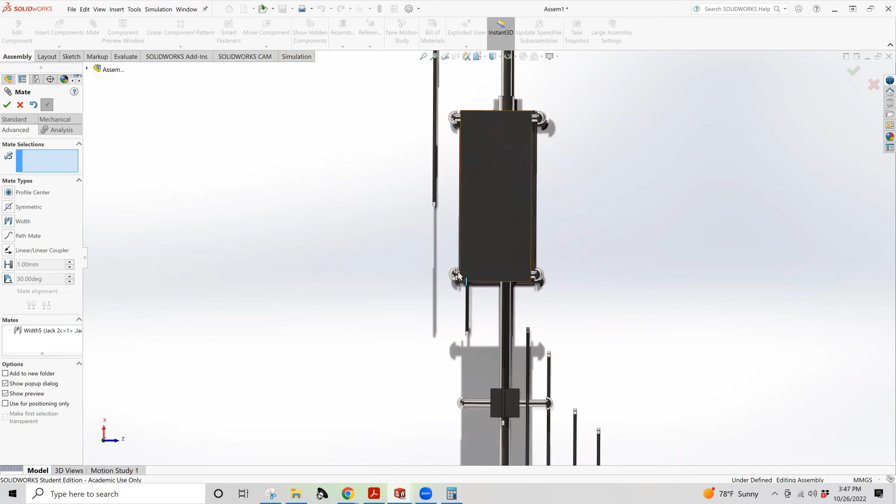So this one, I'm going to pick the outside two of these, and I'm going to pick the inside two of these. What that's going to do is orient this plate such that it's always going to be centered right here, always centered in between these. And that's going to help make things a little more obvious if my view is square.

So it'll be centered. So it looks like these long pin and short pin ended up inadvertently with the same dimensions. So we should go fix that real quick, because the long pins and short pins should be different sizes. So we go back to the short pins.

Let me edit that base sketch real quick. Remember, we deleted that overall length. So short pin should be 0.27 plus the 0.225 overall. I'm going to use that inside dimension of 0.27 over 2, verify that it's correct.

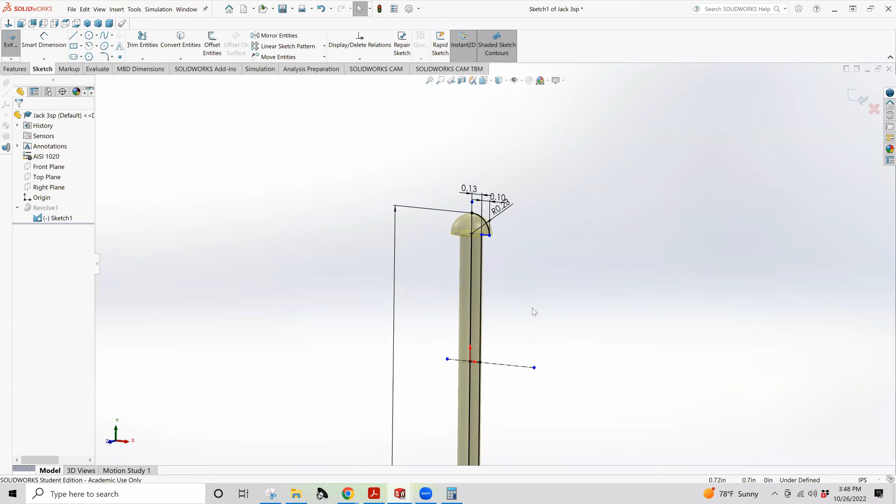No, I don't want the center line, I just want the distance here. I'm going to set this as a driving dimension. I'm going to delete this one. I'll set this to be 2.7 over 2, 2.7 over 2, 1.35.

So I'm going to go in and fix that under the mates. Go. This one. Yes, delete that. Move it out of the way.

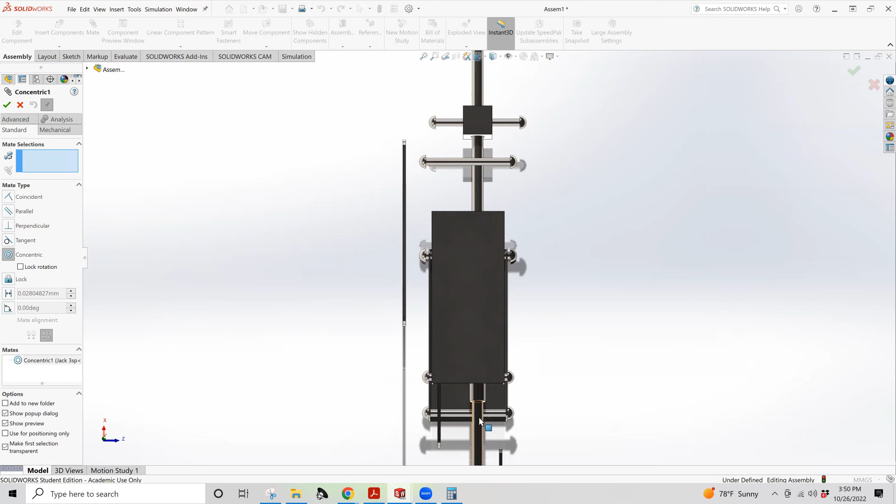That's the first one I did. So I'm going to edit that. And the cool thing is, with the other relations, I can correct this with the other width instead of going back and redoing everything completely. What I can do is, because I set up a width mate for the other one, I can just switch the two without creating a whole lot of hassle.

So that one now is going to end up concentric to this one. And because I've already got the other width mates, I can correct the geometry. That sort of detail becomes important for center of mass later, for a whole lot of reasons. But my two short pins are on top as they ought to be, and two long pins are on bottom as they ought to be.

Now, for dealing with these guys, same deal. I'll start with this one. We're going to go concentric here and here.

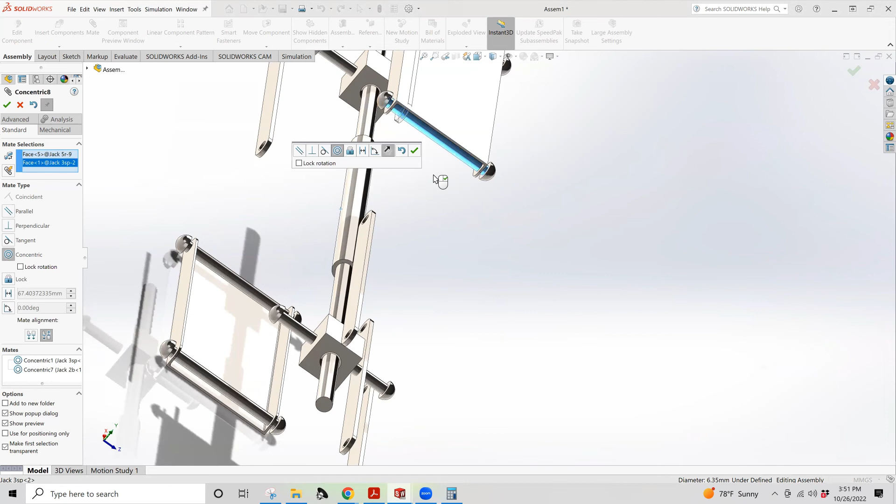And then we're going to find this face, and we're actually going to do a concentric. Actually, we'll do this first, concentric with this one. Now, you'll note how everything else moved in conjunction.

So with these two in place, I can still move this plate, but now I'm starting to establish that there has to be a certain range of motion. So we'll come back to setting angles here in a few minutes. We need a coincident between this face and this face.

So this is now concentric, and we need to double check with our assembly. So this outer one should be in contact with that interface. So we're going to recreate that.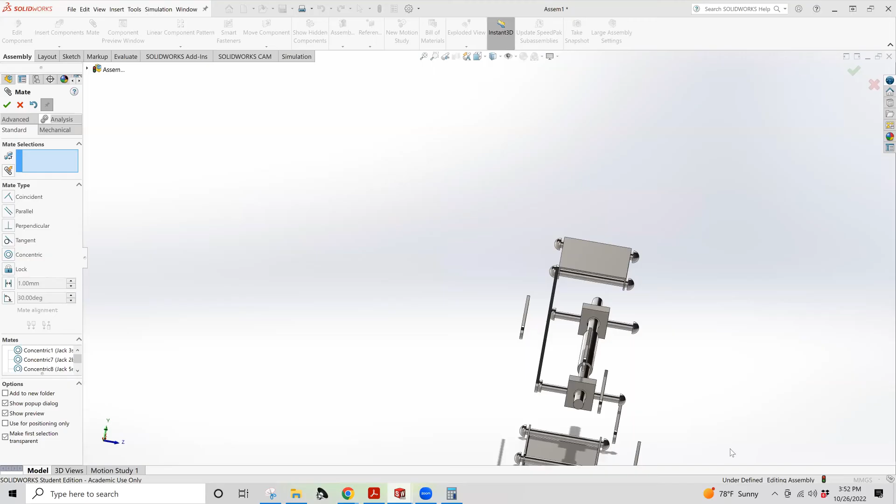So we're going to take this one. We're going to say this one needs to be also concentric to this. And we're going to save that. We're going to say we need a coincident between this face and this face.

Actually, I did that opposite, so let me go in and correct that one.

I'm going to save this real quick and then show you, if you do... So I'll do this as 1B.

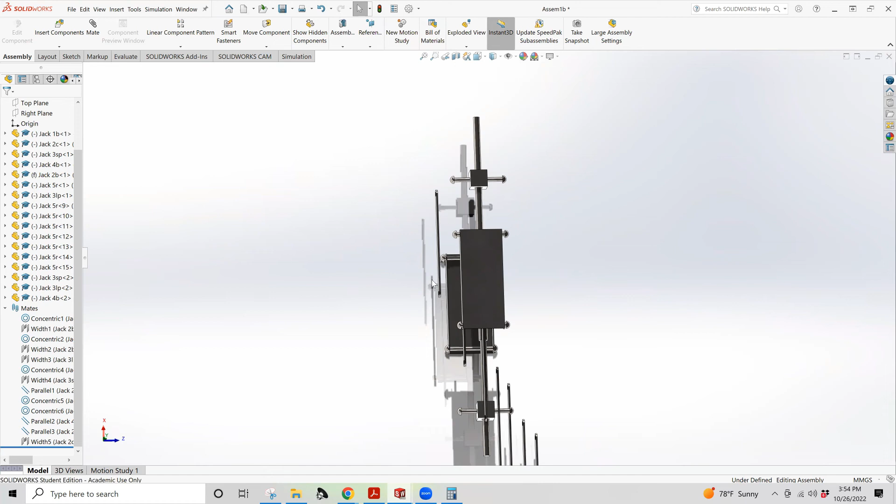If you make the terrible life choice of saying, oh, I made a mistake, and you hit Control Z, all of that stuff happens, and you'll notice there's no redo button. So all those relationships we just had are gone forever. If you hit Control Z a couple times, it will undo most of whatever happened, I think, until the last save point. And in some cases, that can be the entirety of your assembly. So that has very much the capability of completely ruining your day.

So if instead I close this, importantly, without saving, and then I go, that was dumb, I don't want to do that again. I reopen assembly 1B, and I can continue where I left off.

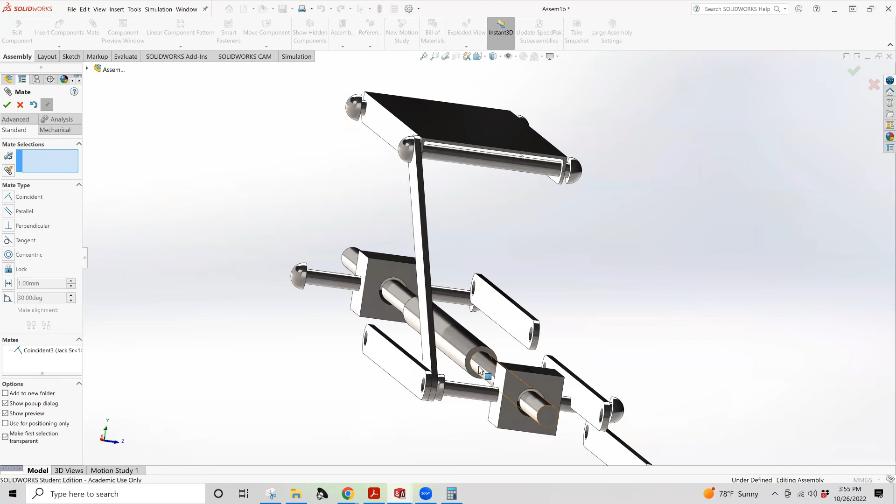So here, I just have to update that last one I did. Need to edit that feature. Clear selections. I actually need this face and this face to be coincident. And then I need this face and this face to also be coincident. Then I need to add the concentric to this end.

Now, when I'm moving this, it maintains a relationship because of how I've specified the details here. So we do the same thing. We continue, rinse and repeat till probably all of you get so seasick that you throw up.

Concentric, check. Coincident, face, face, check. Concentric, cylinder, check.

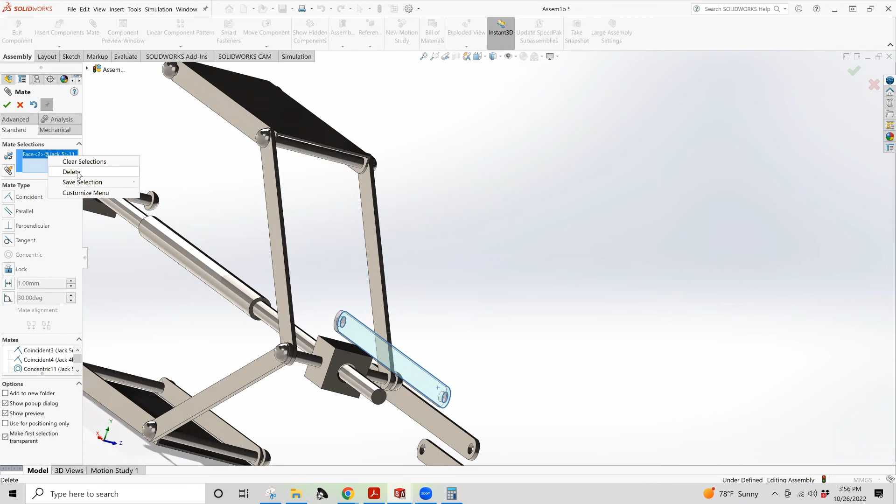Actually, face, coincident, face. Then we can do concentric afterwards. You don't have to start with concentric, but sometimes you can cause things to get moved inside of other parts, create all sorts of headache. Once you've established the other relations, you don't always have to establish the coincident, for instance, for those faces. You can actually over constrain if you do that, because this can't go side to side.

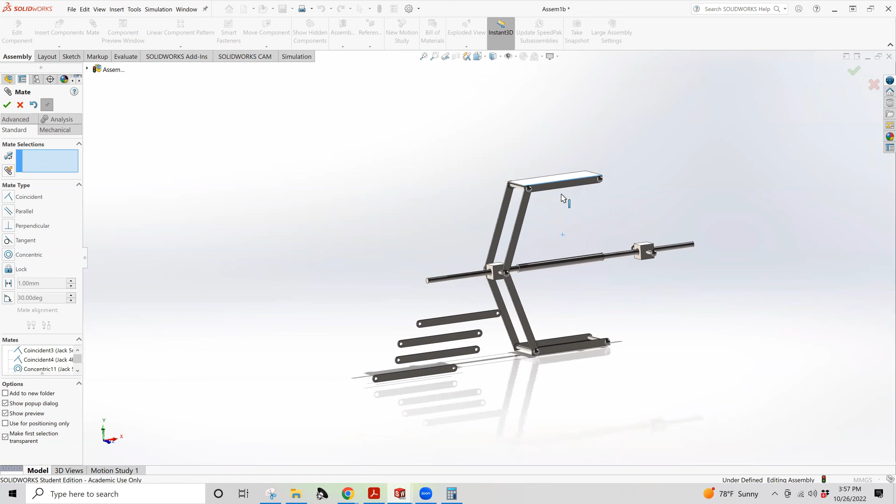It can do wonky things with angles, but it can't go side to side. So we're going to get that again close-ish to where we want it to be. And now you can see that our range of motion here maintains an orientation that becomes pretty important for getting all of the angles set.

So we're going to do the same thing, concentric with this guy. I'm going to go concentric now with this one. Coincident between this face and that face. Now we need this guy, concentric, this, coincident between face and face. Other end, concentric with the lower pin.

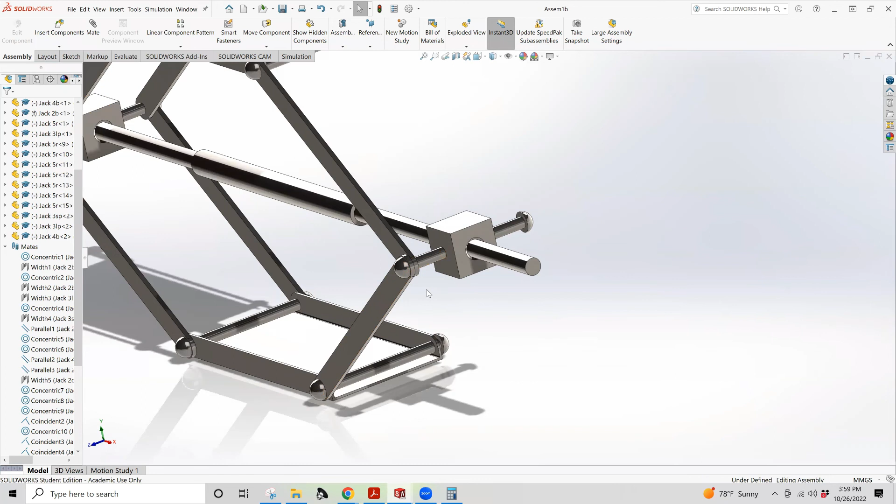And you just systematically work your way through, saving early, saving often. You can't save until you step out. So sometimes it'll ask you to save and update all the parts. Sometimes it won't. Go back in, add some more mates.

Okay, concentric there. I'm going to do another concentric here. You could do concentric to the opposite cylinders. You just probably don't want to be in the habit of doing that. So then a coincident. Coincident between that face and this one. That gets everything all nice and neatly lined up on the exterior.

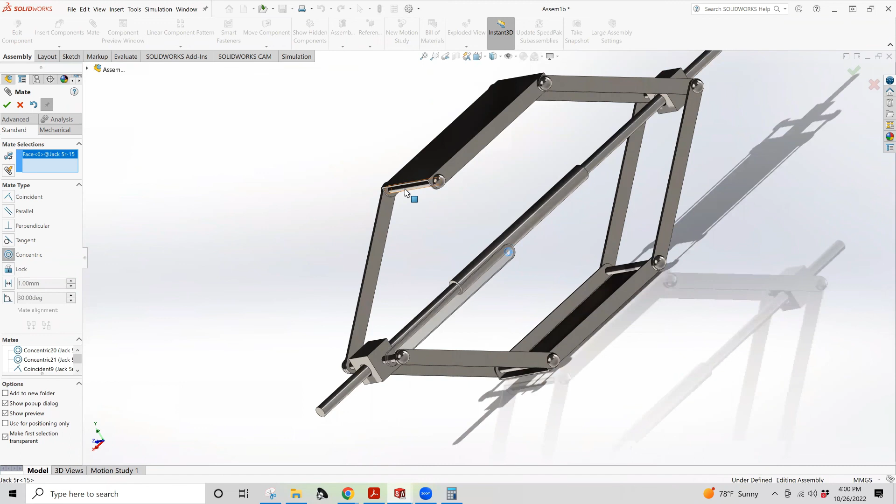Now, same deal. Concentric. So this is why assemblies take a lot of time. They can be very time consuming. And especially if you make the horrible, terrible mistake of ever hitting Control Z, you'll wish you hadn't done that. So you want to be very intentional. You want to plan. You want to have a clear idea exactly what you're doing beforehand.

And coincident there. Check. All right. So all of our parts are connected and our range of motion is constrained to within this axis. And now what we want to do is we want to say, okay, we need to define the angle to get it to be just what our instructions say. So 36 degrees. And then we'll talk about coordinate system.

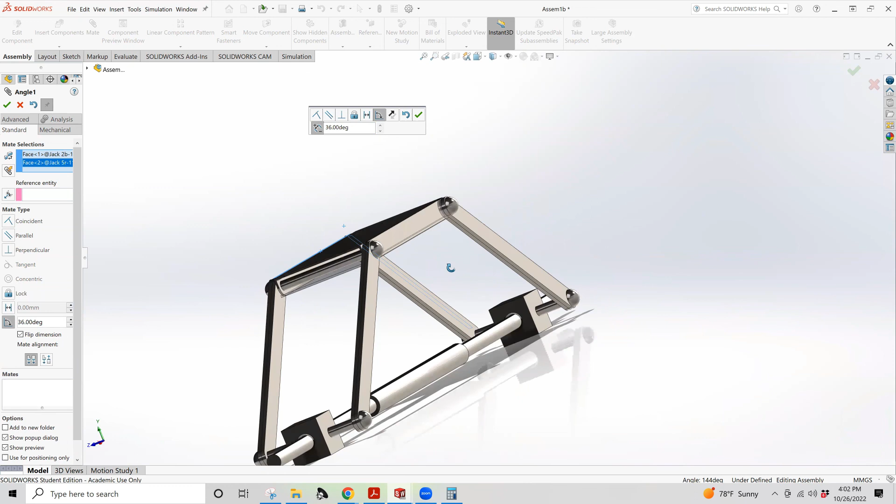Problem is, well, that would be called mechanical bind, is what that would be. So that's obviously not quite correct. Let's try the anti-alignment. Not quite. That's still the two plates on top of each other, and that really doesn't.

So sometimes you're setting an angle, and you have to do what's called the flip dimension here. You have to flip the dimension around to get to 36 degrees for the angle you're actually looking for. Why? Because go back and see geometry and proofs and reference angles and parallelism and all those fun things that probably give a few of you nightmares back when you were wearing headgear as a kid. So you play around with those parameters until you get the correct direction for your particular angle. If you've done all of the other constraints correctly, which we have here, then you've got

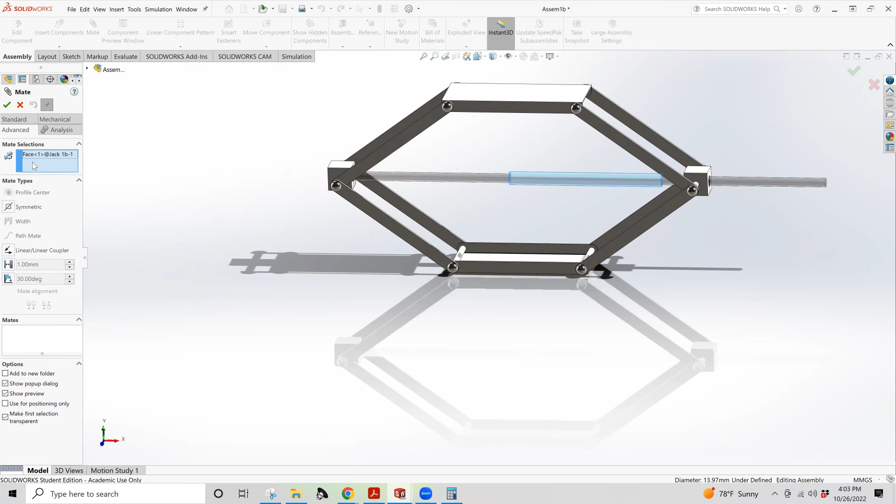things set up, and now this won't move. This is now fully constrained. This can move, but that's about it. And really, for the center of mass, this too has to be constrained. So you guessed it, there's going to be one more mate before we can talk about center of mass. And it's going to be a width, because reasons. Makes life easier. Trust me, I'm a doctor.

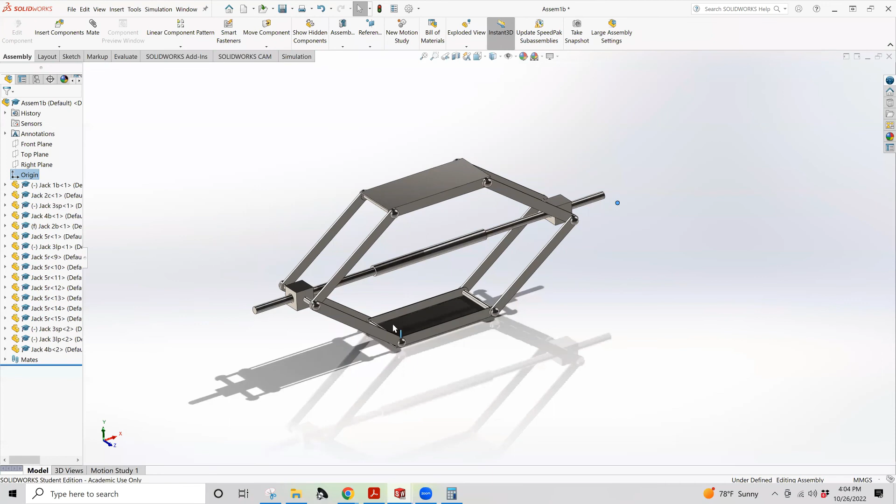Origin. It's way over here in the middle of space. Grand. But we need the origin to be here. Well, you'll note something that they have written here, coordinate system 1. It's almost completely implausible to have you guys start bringing stuff in to the actual origin. You can float this and get it close. So you could come in here, you could say float this, and then go, all right, where's that origin again?

And then you go and start trying to move stuff around. You got to make the noise, otherwise it just doesn't. It's not the same thing. And you can try and position it, and then you try and figure, okay, I got to get this corner up to that origin. You start trying to fiddle around with it. I'm really close, man. I'm getting there. But realistically, you're going to end up missing by quite a bit, quite often.

So instead, because that's going to take 100 million years to get there, and you'll never actually be completely accurate, what you need instead is reference geometry, reference coordinate system, and you need it right here at this vertex. Nope. The actual position needs to be this vertex. And if you've got the vertex already defined as part of the x-axis, blah, blah, blah, you need it at this vertex. It's also important to pay attention to the orientation. Positive x, positive y, positive z.

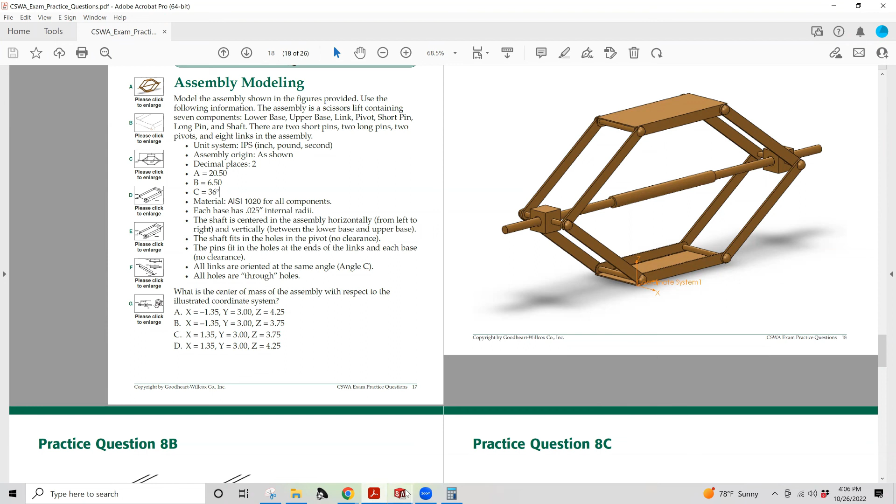Red is positive x, green is positive y, blue is positive z. So we have z going up, x coming out, y going in. So ours is not quite. So we need to rotate it. You can start by trying to figure out how to get there and kind of rotating and going, you need z to be vertical. You need x to be horizontal.

So we're going to go back. We're going to say, I really need not rotating around x. No. I really need this to be 0. And I really need this to be something like 270 degrees almost. And I need that z to be going up. So x is going the right direction now.

And to get Z in the up orientation, you have to play around with this occasionally. So this one might need to be 270. So there I've got Z going in the correct direction, but I need to flip X and Y. So let's go back. Because X needs to be this way. So rotate around. So we actually need to rotate around Z, going the other direction. There we go. We can go minus 90.

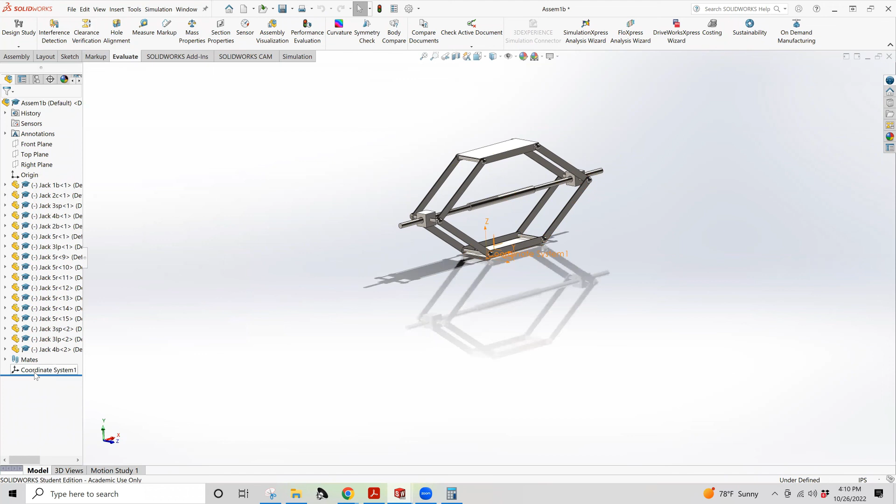So we're still using coordinate system 1. The other thing that we have to do is switch from the default to reference coordinate system 1. Then we see minus 1.35. Bring this up alongside just so that we can see it as a reference. There we go. So X is minus 1.35, Y is 3, Z is 3.75. So our answer exactly is B.

So there's all these little nitpicky details when it comes to how to get this. And obviously this wasn't a staged answer because you guys watched me go through the entire thing live. It's all about keeping very, very careful accounting of all the little details. If you had the X's and Y's switched around, the signs would change for those. So minus 1.35 becomes a plus 1.35. So if you got your coordinate system wrong, you answer C, whoop, wrong, you failed the test. Because that's not the correct center of mass per the coordinate system they gave you.